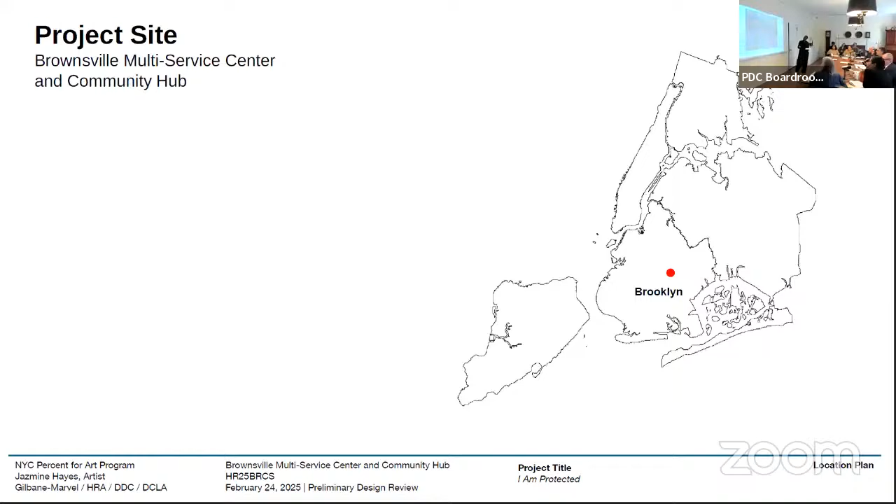So I'm going to go through some of these quite quickly. I won't do an overview on Brownsville at the moment. For those who are home, this document is available to the public online.

Here we are. So just to reiterate the themes of this project, I wanted to focus on themes of healing, protection, and art as prayers of affirmation for the community of Brownsville. Originally, this project was titled the Brownsville Youth Empowerment Center, and so my intention is always to speak to the community, to the youth.

We now have four working titles under the title I Am Protected. These four working titles form one poem, and I will read that for you: In my mother's garden, I am divinely guided. Like the seeds in my cornrows, I shall grow tall to the skies.

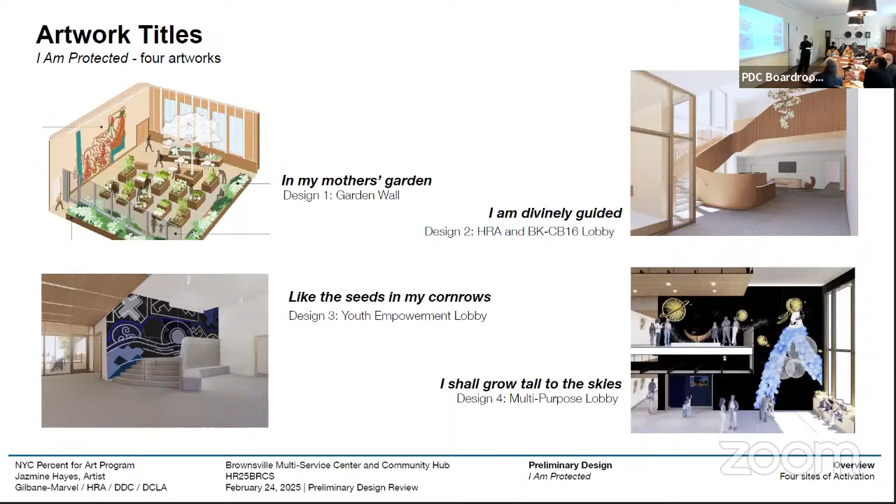So the first design, located on the left wall facing the street and the garden wall, is titled In My Mother's Garden. So we have some elevation drawings, and this is an in situ rendering. It will be approximately 13 feet by 21 feet, very large, and will be a copper relief sculpture.

We've had some developments since we last spoke in June—material development, installation development, and maintenance development.

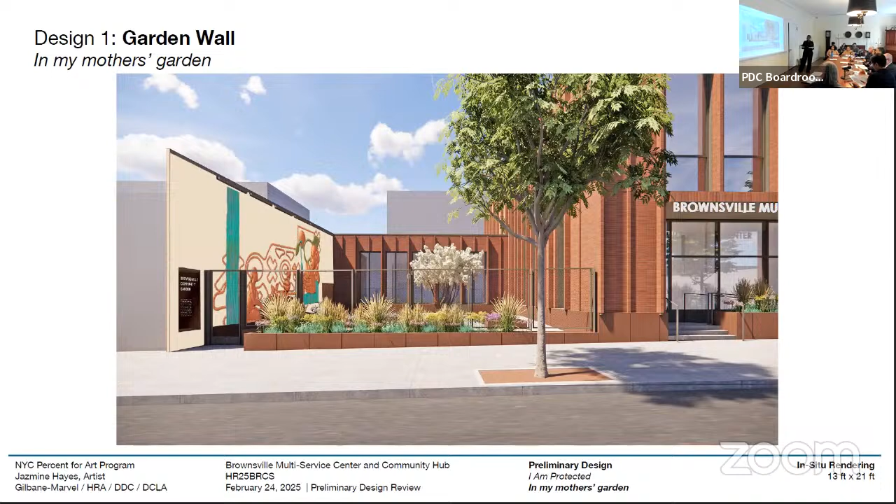So this is the 3D rendering of the design. To your left here, you will see the turquoise patina that represents the river and the water going throughout the design. You also have the braided pattern that is a replica of the aerial view of the NYCHA mapping system of Brownsville houses. And then there is also a green variegated patina for the foliage in the design.

So these are just some 3D renderings. To introduce the process, this is a forged copper process. This is a digital rendering used as a reference, and from that reference we create this 3D rendering to send to the fabricators, who create it using flat copper sheet stock secured over temporary forms like sandbags for bracing.

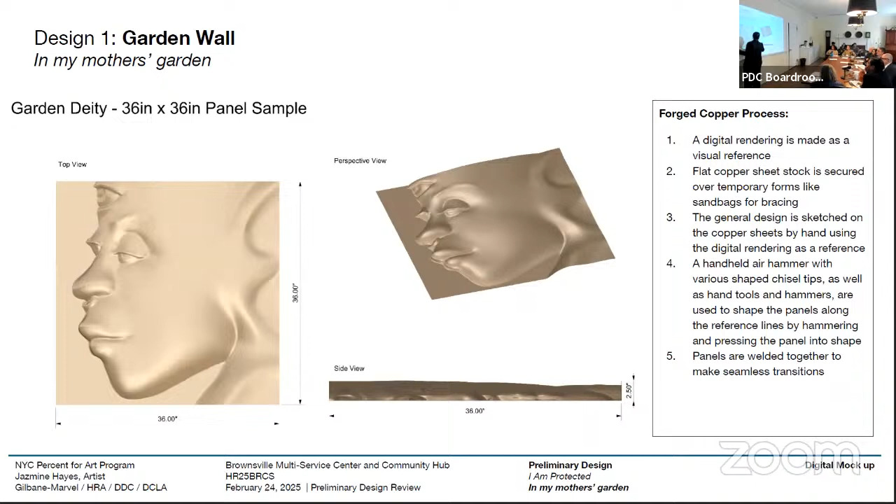The next step is the general design is sketched on the copper sheets by hand using the digital rendering as a reference. A handheld hammer with various shaped chisel tips, as well as hand tools and hammers, are used to shape the panels along the reference lines by hammering and pressing them into shape. Then the panels are welded together to make seamless transitions, and you could see part of that process here—this is the side view, a perspective view, and then a top view.

So far we don't have this in front of you. I myself could not carry a 3 by 3 foot copper plate, but we have this coming in hopefully this week from our fabricators. This is a 3 foot by 3 foot prototype.

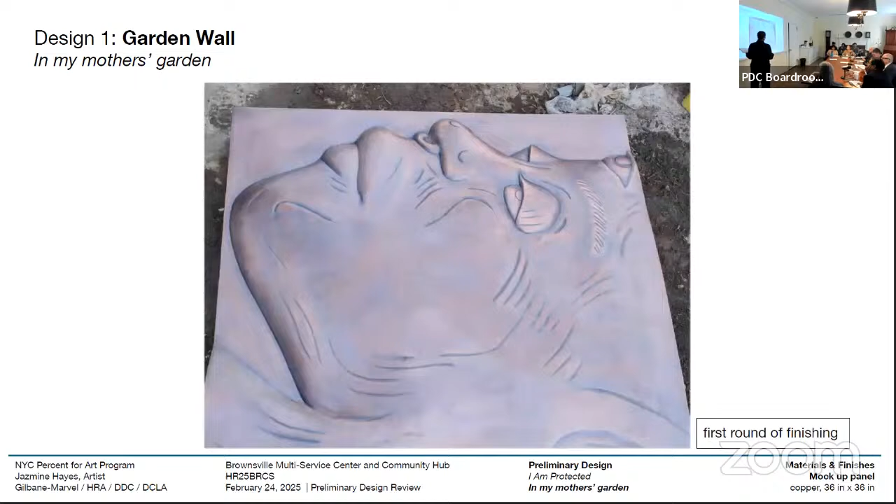The process here: you have the unfinished copper mock-up, which is actually quite beautiful. The first step is a round of finishing, and then this is the finished polishing technique. Right now we are discussing which lines I may want to shift, different things I want to shift to represent the detail in the design.

In this bottom right corner, we have the patina reference, which we're also working for it to look more closely to these examples here. We have the foliage green that will go onto the foliage of the design, and then the aqua blue and the verdigris green. We're hoping to mix those two to get the exact patina to match the actual design.

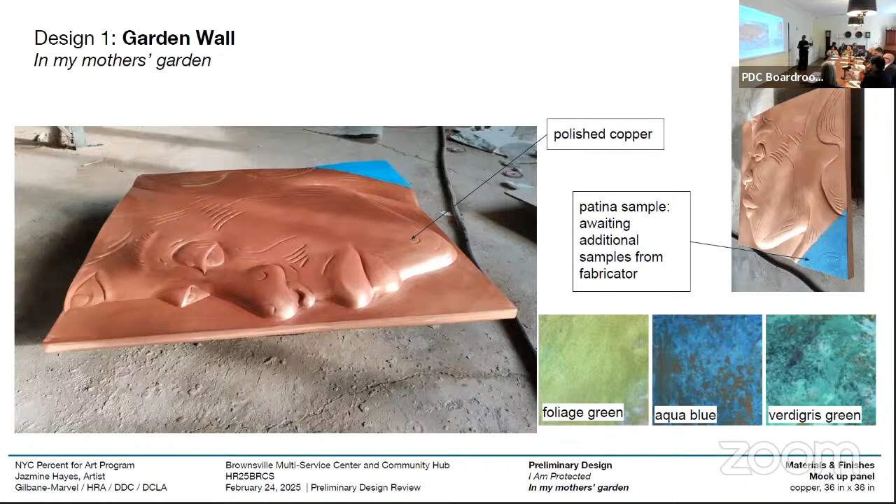The second design is 'I Am Divinely Guided,' located in the HRA and BK CB16 lobby. So we have an in situ rendering here. The design or sculpture will be 10 feet by 8.5 feet. These are just some renderings.

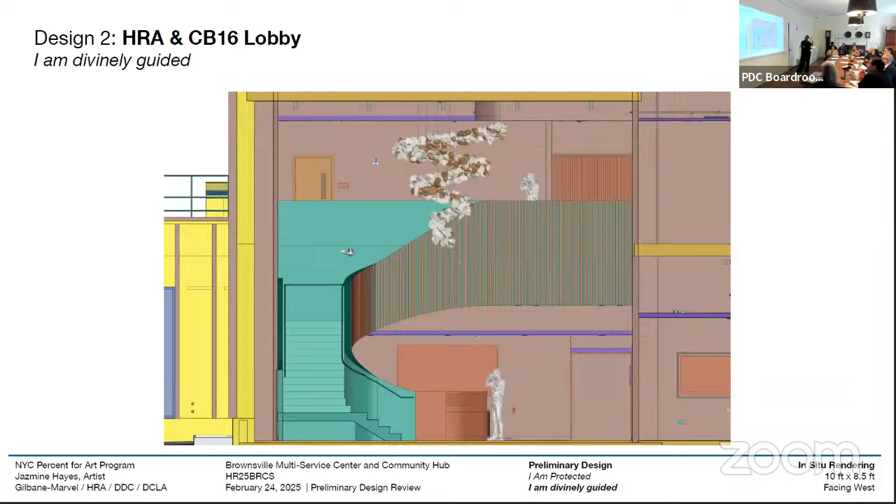I will be working with a community organization — we are still figuring out which one — to collect recycled material within the community. The colors will be blues and creams, to keep this theme of tranquility throughout all the designs, and there will also be a copper finish. You may see some details where, on the actual shell, this will be polished out and sanded before installation.

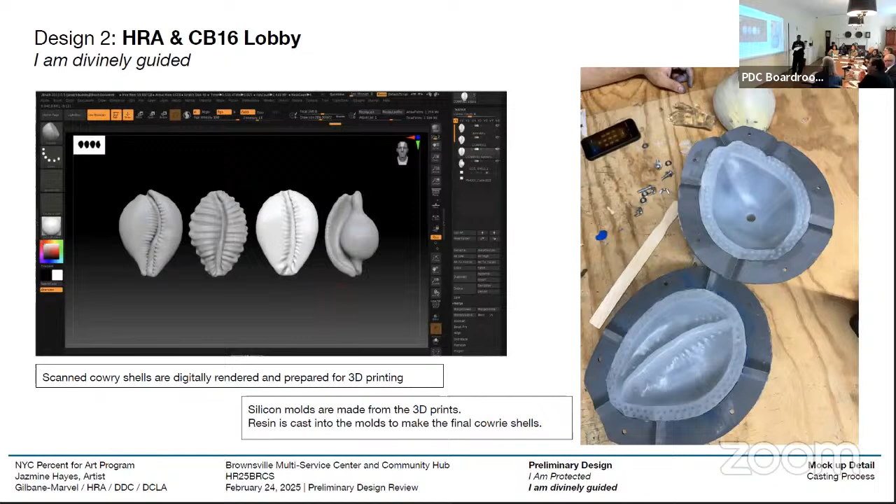To show you the process: we create a 3D print from digital rendering, and from that 3D print, silicone molds are made. Resin is cast into the molds to make the final cowrie shells, which you have in front of you today. They will be sized at 8 inches and 10 inches. The process for the plastic is basically embedding it into the mold, the cast of the cowrie shell.

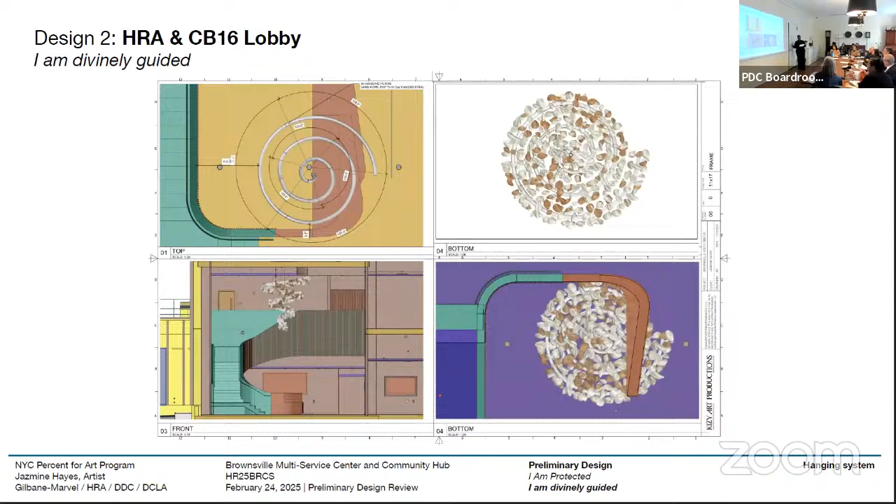There were quite a bit of questions on installation and the security of this piece because it is a heavy piece — it is under 2,000 pounds, which is our limit. I've been working with engineers to look at a steel piping system that will securely install each shell individually.

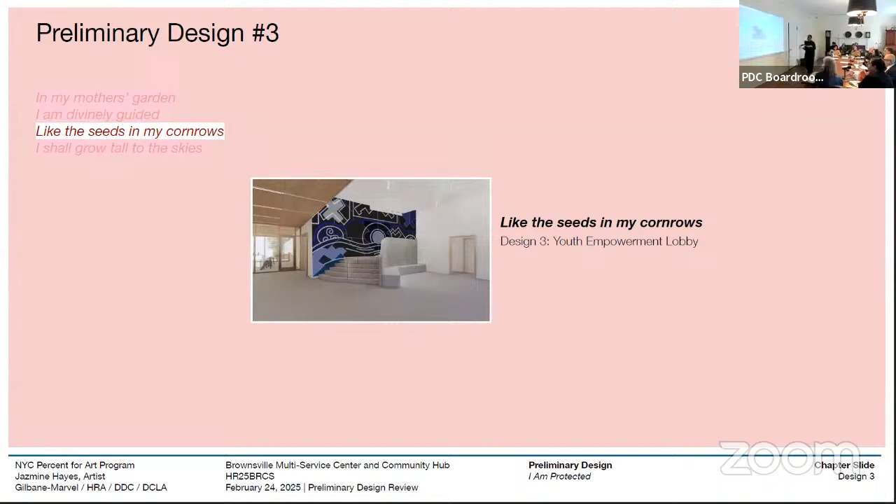Okay, and the next design is 'The Seeds in My Cornrows.' This will go in the youth empowerment lobby.

Yes, my bad, I'm holding onto this like it's my baby. Touch everything you need to, you can pass that around. I'm so sorry.

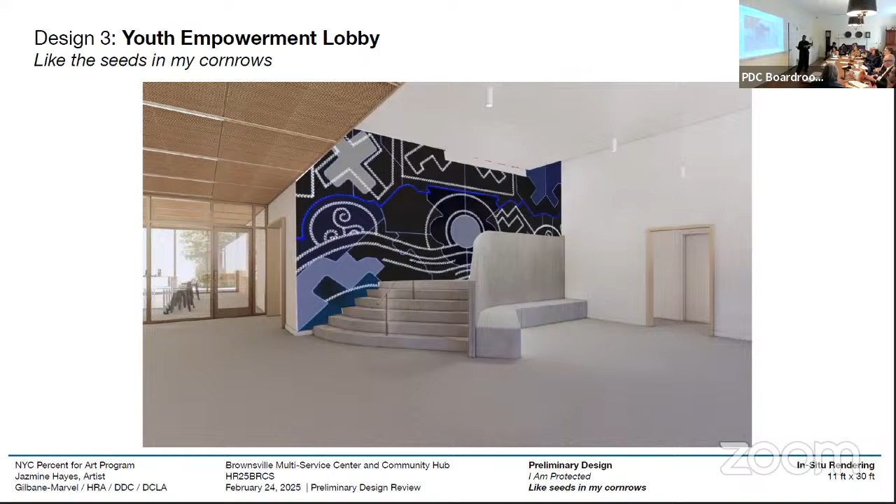So the theme of this design is using pattern as reclamation, looking specifically at NYCHA architectural structures in relation to carceral architectural structures across New York City and the United States. And so wanted to put a positive storyline to these spaces.

Let's go to this example first. The material that I have chosen is the Baltic birchwood. It has a lot of spiritual meaning to it and is also easily carvable. It's often used for drums, etc., and different materials. And so the wood will be stained. We can pass this around.

So the panels underneath to this left side keep the original design of the Brownsville houses mapping system. And on top of those panels, CNC milled braid will go across those panels and designs that the youth essentially created through these workshops.

The youth created different patterns that they wanted to see around them, representing different things like protection. I essentially asked the youth, what would they want their space to look like?

So here you see the braids—I basically took designs from the youth and created and collaged it into different patterning. So here you kind of have like this water wave, you have this circle in the center.

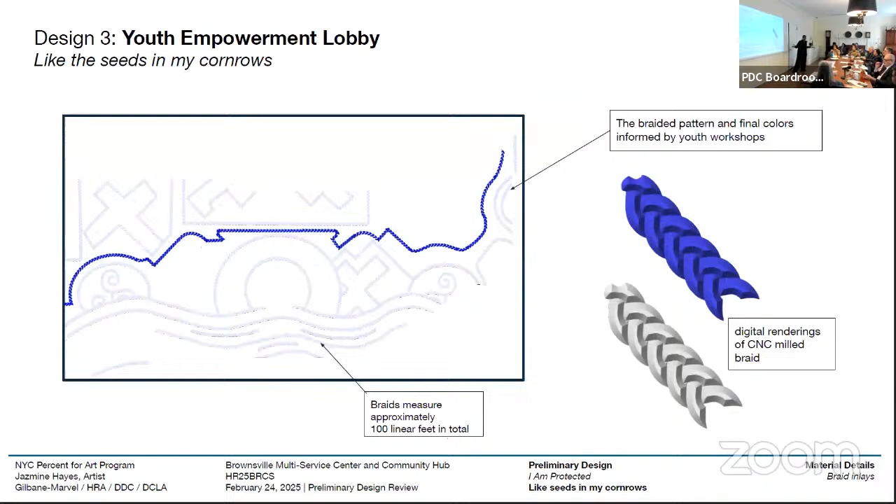The wood will be stained in different hues of blues. And then these are some phenomenal photos from the workshops that we created. We had a master printer from the Robert Blackburn print shop, also named Jasmine. So it was a Jasmine Squared project, working at the Youth Design Center.

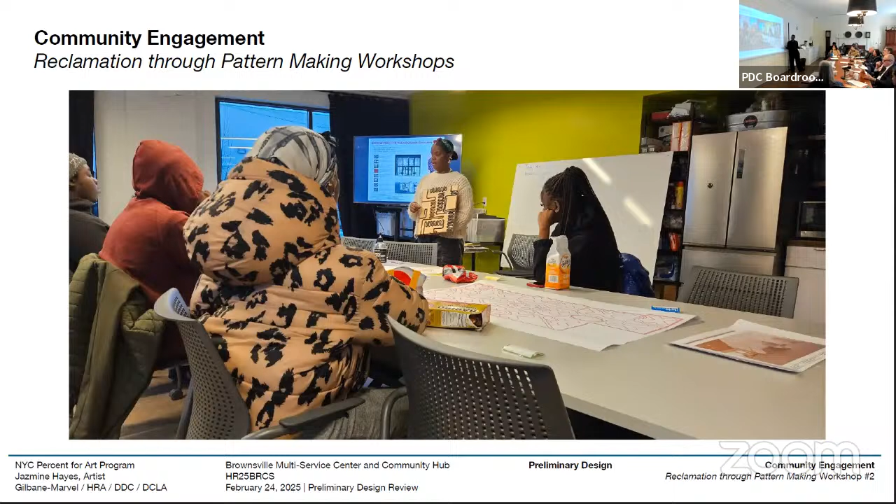And we had about 10 to 12 participants, supplied stipends for them from the budget, and really just wanted them to have a say in this design overall. You could see here like the NYCHA mapping system, and you kind of see that replicated into the final design.

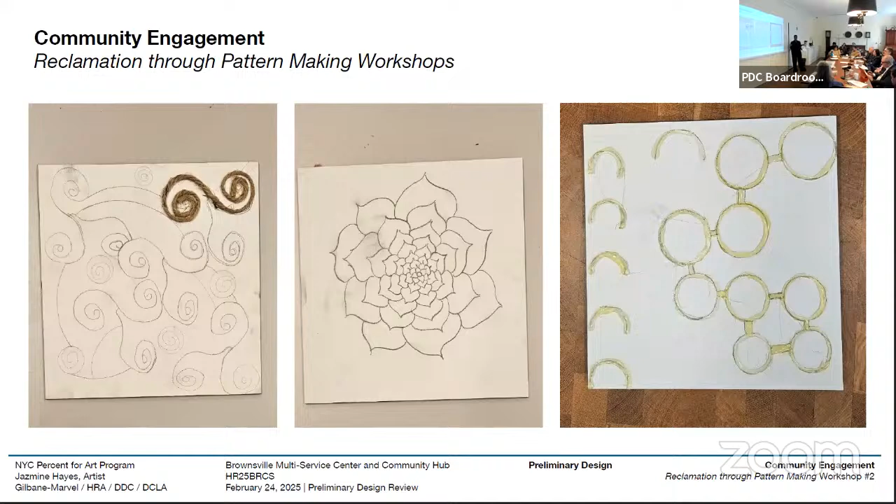So essentially the youth created different patterns, different shapes, and put it onto a plate to create texture, which is called a collagraph. Some of them did a blind print with no color—this is my work here, which is an example of that.

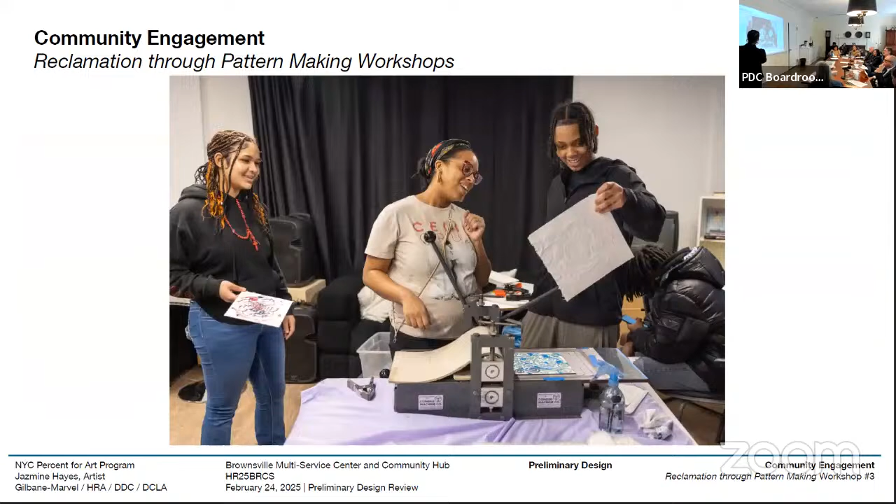But they also had the opportunity to play in some ink, which was really messy. We gave them like 3 colors and they were like, we need more color. But overall, that is Jazmine. It was a really beautiful experience.

Okay, we got a lot of slides. The last design is I Shall Grow Tall to the Skies, located in the multi-purpose lobby. This is an in situ rendering of the Moko Jumbie figure—the Moko meaning healer, Jumbie coming from the Congolese term Zambi, which represents spirit or protector.

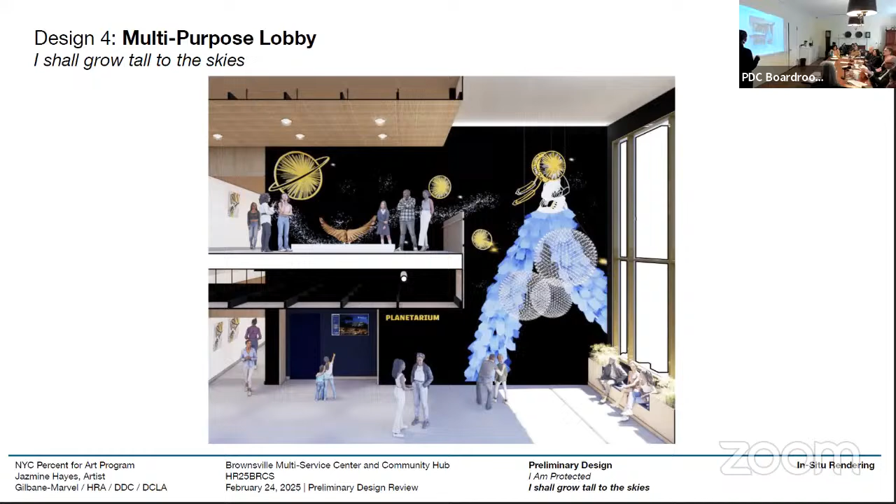Overall, the theme of this is the Moko Jumbie is the protector of the village. Brownsville is beautifully called the Ville, and so that is short for the village. I wanted to instill those thoughts of protection and also have a cultural reference to the community.

This is our most complex design, actually, which we didn't expect, but there will be 4 parts to this design. So the first part are the planets, which will slightly protrude from the wall, made by a CNC milled acrylic sheet with a copper paint finish.

The second portion is here—it is the torso, which you can see here. It is the head and the torso made from a CNC milled acrylic sheet and hand painted as well.

And then we have the Moko pants, which essentially is a relief. It will be CNC milled as well. The material is an EPS high density foam, or a better terminology is a high density urethane. It will have a hard coat application and a single color painted primer.

To the right here, you can see it outlined in red. It's kind of hard to see here on the screen. But basically, this will be panelized into sections and installed.

It won't be like single sheets. That's a lot of work, so I want to make sure that's clear. Yes.

What happens, same kind of thickness? This is something I need to speak with the team about, but it will have approximately the same thickness and it will be rounded, just thinking about kids, adults, people being clumsy. We don't want anyone running into a corner of anything.

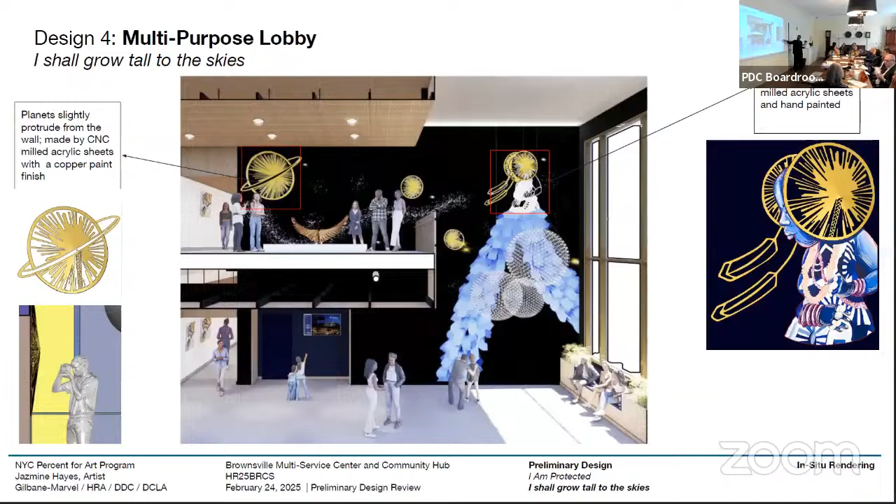And then the torso will be hand painted. Again, also texture, we'll have lots of texture as well.

And then you also have the sample of the rag roll. So the samples that you have in front of you today, it is matte. It's just the paint finish. I hear you talking about it.

Yes, so my team specifically is talking about an intense hard coat application. It will also have a sheen to it. The rag roll finish will also have a sheen to it as well, just to think about it, because matte things can be destroyed very easily.

This is also another opportunity for community engagement, for a one-day astronomy-based art making workshop using references of constellations and planets. Parents, elders, and youth are welcome to attend to create an intergenerational activity with the Brownsville community. Workshop outcomes will inform the design development of the Moko Jumbie pants.

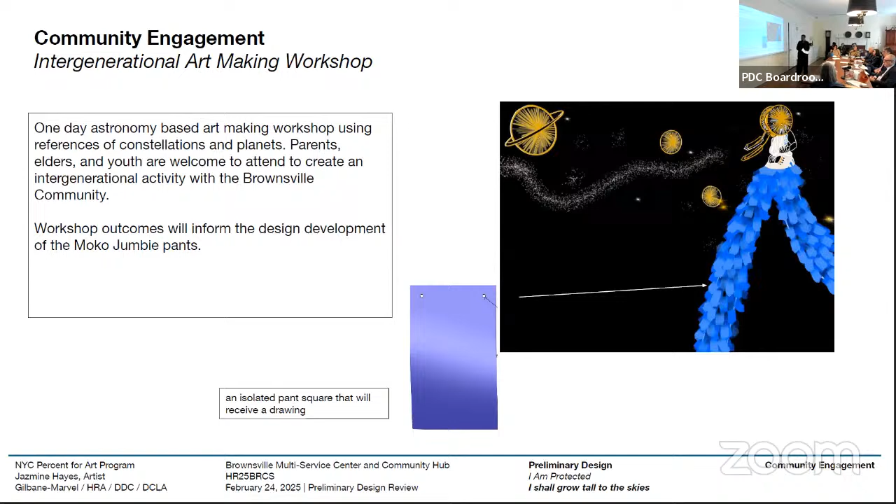And so there will be select pieces of the pants that will have drawings in this style. And so you could see here, these are just some examples from another project created specifically for the Brownsville houses.

Yeah, I think that's most of it. We will go into signage now.

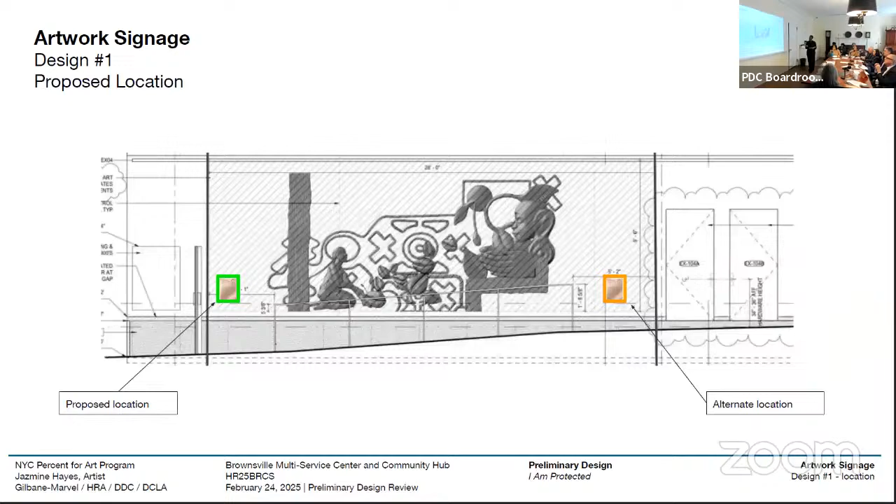I will come back to this slide, but the material of the signage will be laser engraved copper plates with black infill, which you can see here on the text. Each sign will have part of the design relieved onto the copper plate as well. They will all be sized at 11 inches and 14 inches. So these are just examples of placement.

And then maintenance. I really want to keep maintenance as minimal as possible. Getting excited again.

So the garden wall will have a graffiti coating or sealant and minor rinsing with a hose. This will routinely happen once a year, and this graffiti coating will also help with the patina aging, as it will actually slow down the patina aging on the copper sculpture. I am okay with the aging of the sculpture, honestly speaking, as the neighborhood changes, et cetera.

The HRA and CB16 lobby will have periodic dusting. The HRA has agreed to doing this routinely every 6 months, where someone will come in. We've talked about a vacuum system versus the dust being blown everywhere. I was just like, where will the dust go? And so it would just go in other places.

And so using a vacuum system to dust the cowrie shells, we've changed slightly the positioning to make sure it is accessible. And it will have to happen after hours when there's not as much traffic in the building, of course. The youth empowerment lobby will also include a dirt-resistant sealant and occasional wiping down, and the multi-purpose lobby will also include those same things.

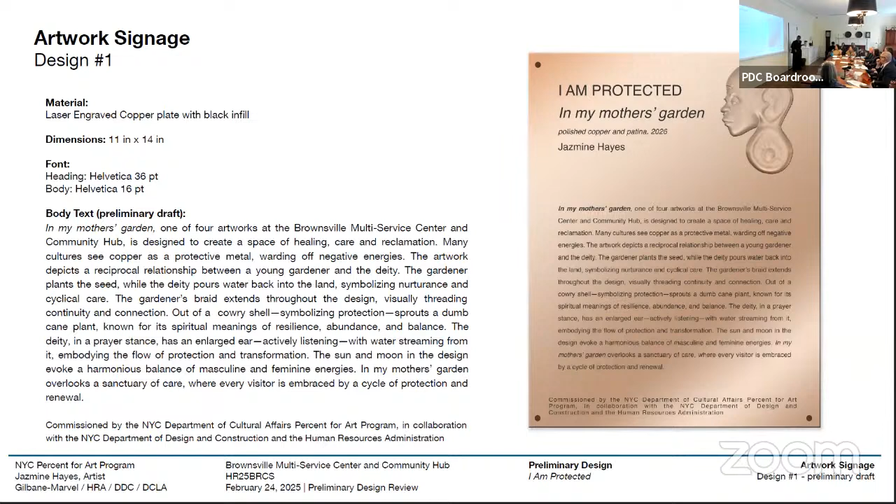Yes, well, me and the studio manager, we worked tirelessly on this. And so each design has a very detailed description of the work and the themes of the work.

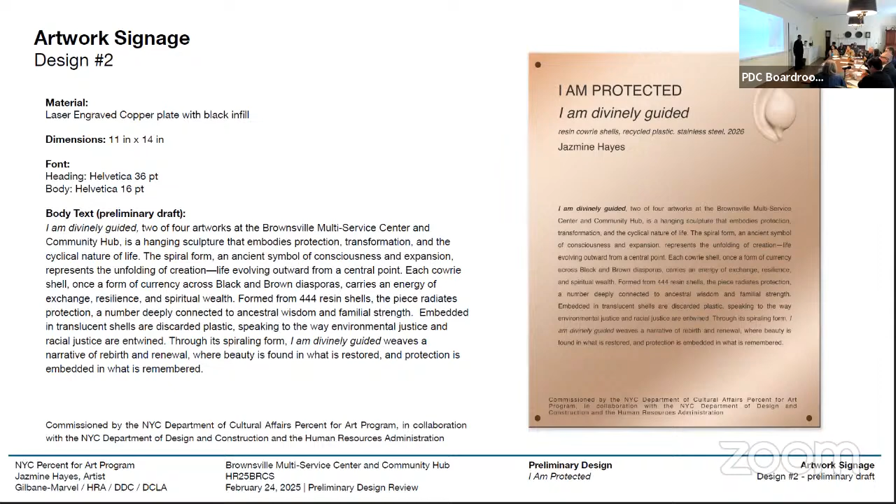The storyline, the narrative throughout is just really, really empowering and powerful. I love that you include the public housing throughout and weave it literally throughout the pieces. It's just so important. And it's gorgeous, the braided patterns. Even talking about the Ville, which is something that folks here, including myself, may not be aware of, but you're making us aware of it. It speaks to the village that raises the child, how embedded you are in the village, that you're serving here. It's just really, really gorgeous.

And then these materials and colors. It's a project that is so exciting to think that people will be able to see it and be there and touch it, maybe not too much, but a little bit. And we all can see it too. It's such an amazing addition to Brownsville, but also the city of New York. So just gorgeous. Thank you so much, Demi.

Yeah, I just want to, hi, thank you, Lauren, and second that and say it's an exemplary project. It's really an exemplary project. And I appreciate so much about it, but specifically, I wanted to talk about the materials and the detailing, because I think you've really taken this to another level of projects we've seen. And I'm sure you're working with Silman, structural engineer, and all those attachments, and it's both innovative and feels a part of the place at the same time, because of the content you're working with. I also wanted to commend you on the signage, because it's fantastic to have somebody thinking of that and making it part of the whole project, placing it and writing it, and the material of it, so it all fits in.

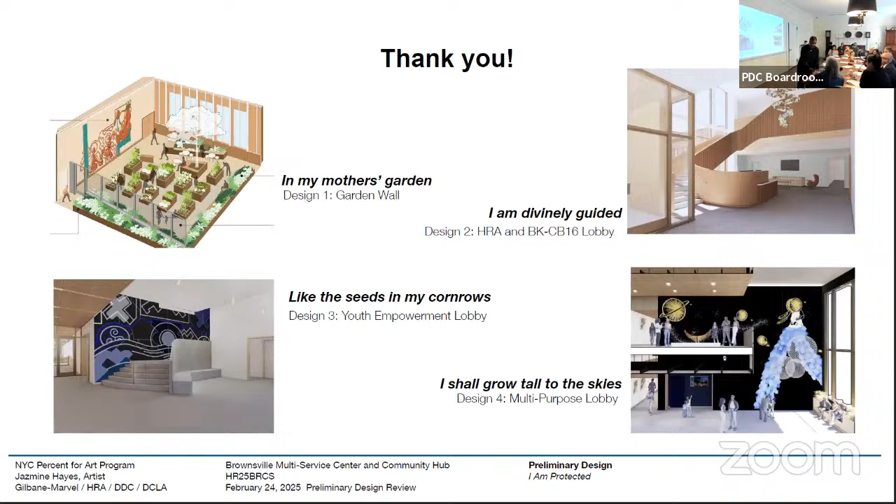So I wanted to ask one question about the cowries, which are so beautiful. I was trying to figure out how close I can get to it when I'm on the stair, because it looks so interesting to be able to see the material inside. I love seeing the recyclables in there. So I just want to make sure I can see it, but I know you don't want people to touch it. I didn't want to suggest what to do, but I think you've got great open ideas to any suggestions you may have.

I was wondering if one of them should go somewhere where somebody could actually see it, but I don't want to take away from the beauty of the spiral. So I thought if somebody could really look closely, it would make it even more powerful. We could talk to the team about maybe making an extra shell, like how you have this prototype in front of you, and next to the signage there's an encasing of that shell so people can see. That would be so cool. Yeah, I think that's definitely something, and I appreciate that.

When you're at the top of those stairs, is that wall - I can't really tell from this rendering - how far away is this like painting? So you will be able to see it but you won't be able to touch it, which I think is good. Because they're heavy, right? So you don't want them to touch it.

Are you always using recognizable materials like the Dixie cup and the spoon? Because when you were moving it the other way, I couldn't tell what it was - I just saw that it created a beautiful color. Some of the shells will face outward so you can see the material in it, and then some of the shells will be kind of abstracted, which I want - that abstraction.

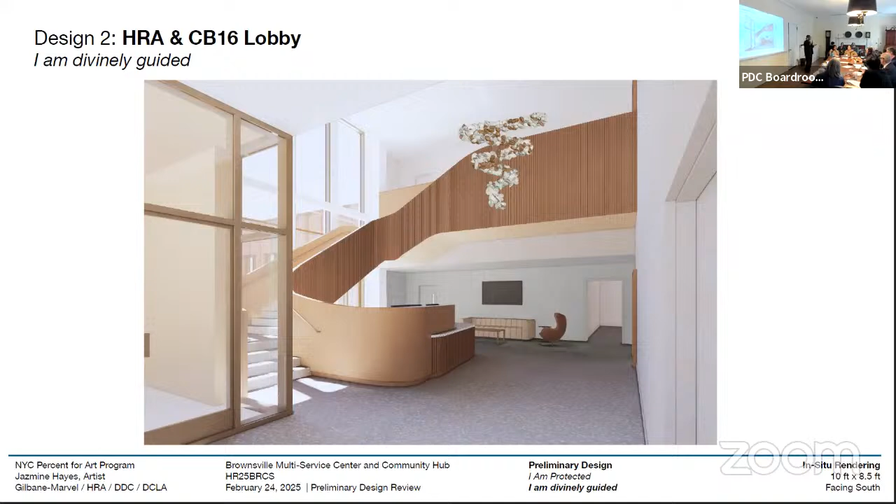We did mention this in the appendix. Sorry, I'm going through all the slides - we had sent in a rendering, so, yeah, there we go.

In this rendering, because there was a question about seeing the material, we gave an abstract rendering of what it may look like from afar. You can see also in that rendering, when you look closely, that some of the shells, like the booty of the cowrie, will face out.

I think it's a question for you - do you want it to be recognizable, or do you want it to be subdued? Because these objects are so recognizable once you know what they are, if you had the sample then you could look up and say, oh, I get it now. But I also don't think that's necessary if you don't want it to be. So it's more of a question of what you're actually embedding in there, and something that people can tell what it is.

For myself, it is necessary. I think sometimes, although I am using abstraction in some of these designs, I want there to be recognizable symbols in each design. So I do think it's important to acknowledge that some of them will face out so you can see that material. But I don't want it to be in your face - I want the viewer to essentially one day be like, oh, I didn't realize these were solo cups, or maybe I need to look deeper at this.

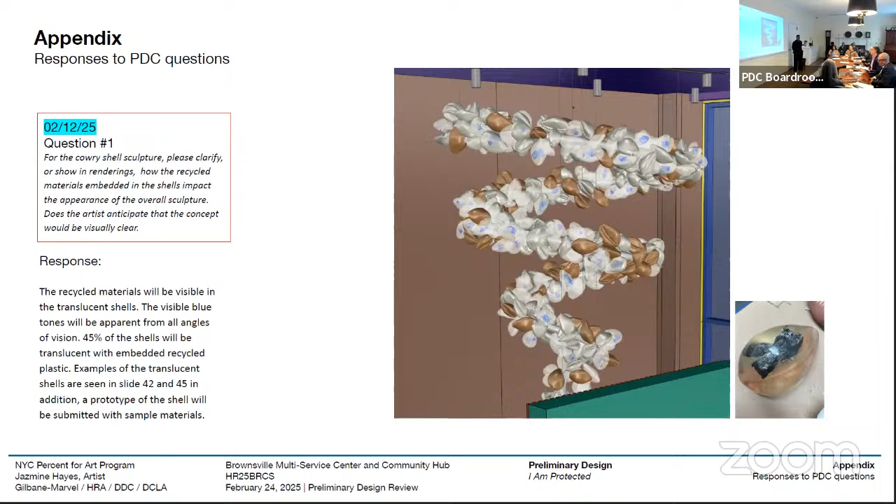The CNC milling, we are essentially paying for labor for the CNC milling, so we have some guidelines to limit it to 100 linear feet. I've wanted to shift things, making sure that it still is an example of the youth designs, but also making sure we're fitting in budget as well.

I just think overall what you've done here is so amazing, but the youth empowerment lobby remains my favorite aspect of it. Thank you. It blew me away the first time, and we'll talk about a personal piece outside of this. But yes, okay, thanks. Thank you, so beautiful. It is. Thank you.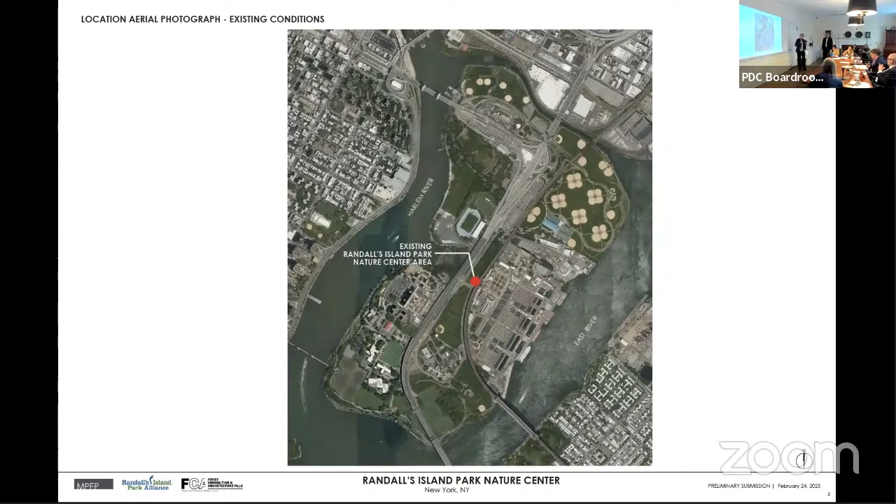This very central and visible building currently holds our sports fields crew, who are going to be moved elsewhere. It's actually a little confusing because the building is so central and welcoming that people try to visit our fields crew.

Next slide, please. This diagram was put together specifically to emphasize the centrality and accessibility of the Nature Center. The building is adjacent to the park's roadways and parking lots, as well as public bus stops, and is especially accessible via the island-wide bicycle and pedestrian pathway system. You can see under the arches of the Hellgate Bridge, the Hellgate pathway runs along the north-south axis of the park and makes it especially accessible via bicycle and pedestrian routes.

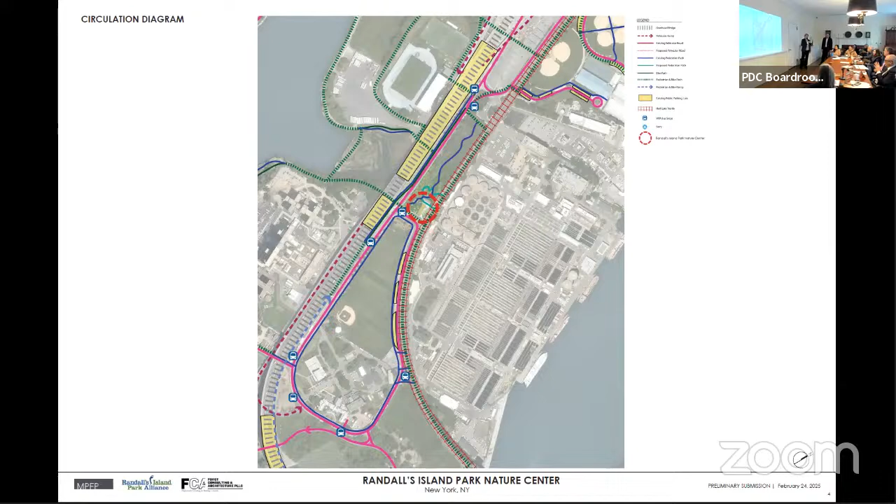The new Nature Center represents the catalytic first phase of activation of the site. It will take advantage of and help RIPA educate visitors about the adjacent salt marsh and freshwater wetlands. They were restored in 2008 and form the center of our waterfront stewardship environmental programming, serving thousands of students each year in partnership with public schools, mostly coming from East Harlem and the South Bronx.

So you can see the salt marsh here and the freshwater wetlands here. This new nature center will really foreground both of those resources, and the freshwater wetland especially is a non-point source pollution filtration mechanism, naturally filtering stormwater that comes in from the adjacent fields and roadways. It's a wonderful teaching tool, to which the Nature Center will bring additional visibility and attention.

In the next phase, the center will also host volunteer events, free public events, and programs in tandem with our urban farm, which is an easy walk just south under the Hellgate footbridge, the Hellgate trestle.

The next phase envisions further activation of the site across the road with access pathways, additional parking, and a salt marsh viewing platform. So you can see the Nature Center, and then you can see some of our plans for future phases to activate the area between the two marshes and also adjacent to the Nature Center.

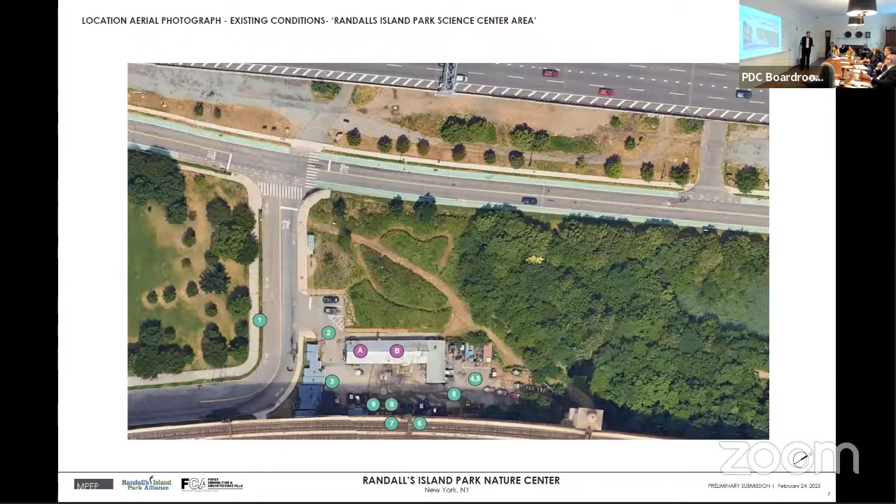If you look at this building, it's a relatively tight footprint we're working with. We looked at really just redoing the roof in a scheme, essentially building outside of this building and putting a simple roof over it, raising the glass to give a feeling of a much bigger building. But the existing walls all remain, we're just encapsulating that with our new facade. So you can see the current condition.

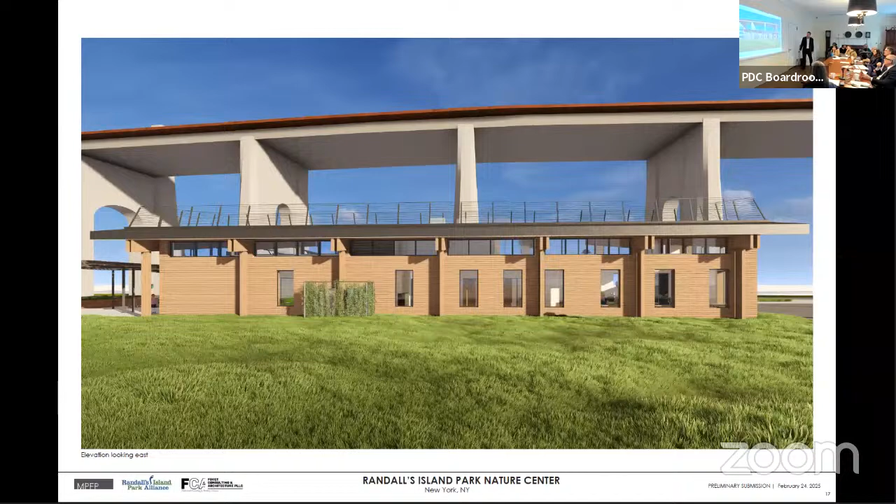It's easier to see in this view. Those CMU walls still exist and are all enclosed, but we took the structure, built it around and above, kept the roof relatively simple, made it a green roof, and encapsulated the rest of those walls. As part of our grant we had to leave those walls, so most of our windows line up with the original windows, with some small modifications. Adding that clerestory is really where we think we'll get the benefit of both the light and the feeling of space. We also wanted to add the green roof and solar panels, but that's more part of the programming discussion with the Nature Center and classroom.

We have a relatively tight footprint, as we discussed, and we're trying to fit a lot of things in here. There's a lot of program and staff that have to be supported in the area on the left. We've worked those little desks as tight as we can to fit the staff and provide bathrooms to the public as well as the staff in the classroom areas.

We did want to open up one side as much as we could. That's where we're not following the original footprint, having that glass open up so the classroom can come outside. We have a pergola for shade, and eventually the natural resource group will be planting that with plants as well.

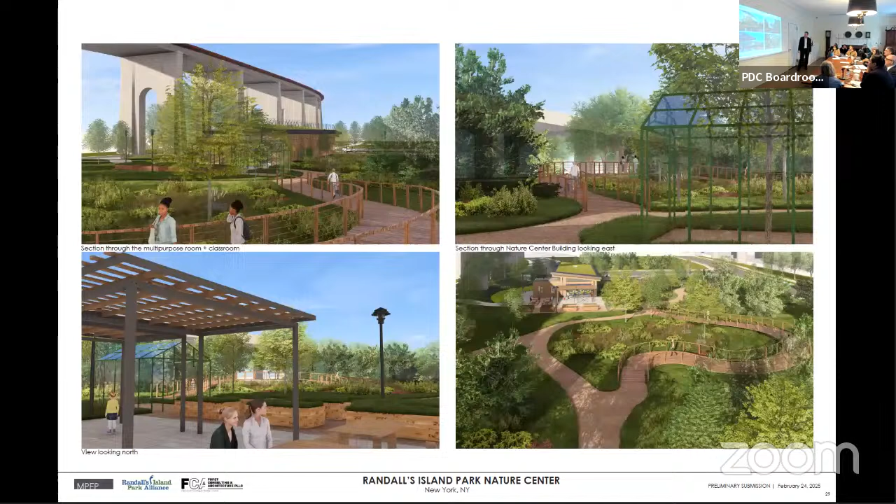We brought a sample of the Thermory. It's essentially a modified ash, and aluminum trim would be the metal for the windows, the black flat mat, as well as the facade of the fascia. Some concrete paving as well, and then some of the walkways would be gravel that we've worked with Parks on, based on other standards they've used throughout the island.

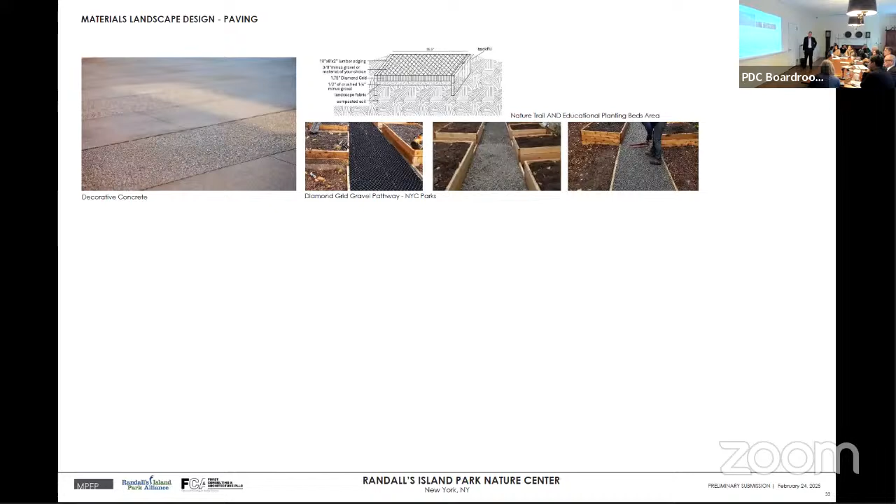Same with the furnishings. Plant material, again, somewhat native, working with a resource group on the island. They're going to handle most of the planting themselves. We'll just assist in getting some of the procurement of it. I think that's it.

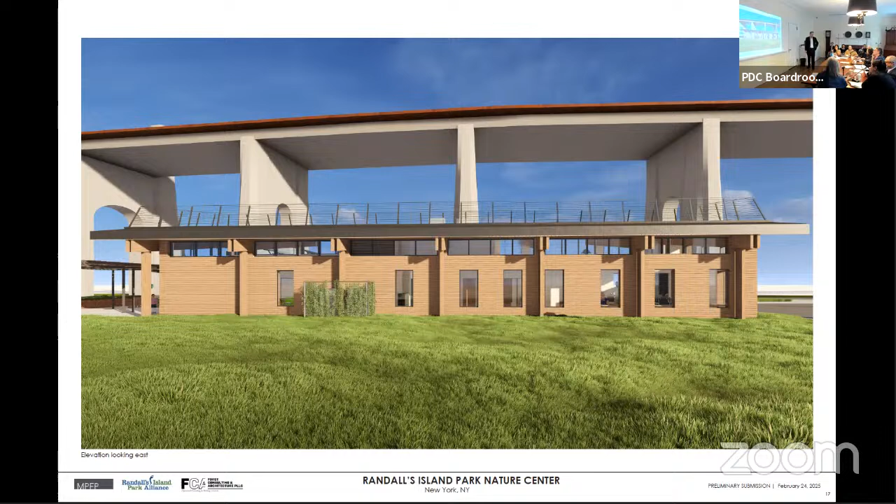Yeah, I would tend to agree. I think part of what becomes distracting is the angled corners. They almost become an architectural expression in itself that is fighting a little bit with what is a very elegant architectural expression beneath. You mentioned the idea of maybe adding other plants that are not sedums. I wonder if something taller, should you have the proper soil depth to support it, may distract a little bit, or not make it so present.

Another option to consider is that OSHA does have a certain reach within its code. I wonder if there's an opportunity to put a planting bed outboard of the guardrail that you can still maintain from inside, hands reach. By having maybe taller grasses or something of more volume, you minimize the aesthetic of the perimeter guardrail, and maybe bump up the aesthetic of the sustainable aspect of the building, which I think is great.

I was going to ask before Jimmy asked if this was accessible, because as a learning center, being able to bring especially children up and see that would be great. If you're not able to do that, I understand there's also operational things, but maybe having a little bit more landscape expression could be another opportunity to highlight the great things this building's doing.

Okay. I know you had a straight rail before. Yes, and the minimum height you have to have is 42 inches, it does have to be 42, so it's a code, you have to, there's no way around it.

But I think the suggestions of the landscape are a really great idea. I don't know if you can get it in there, but you'd have to put an elevator to make the roof accessible, and there goes your footprint budget. Within the building it doesn't really work, you can't even have a stair outside, because if anybody goes out, they have to have an elevator. So for such a small building, it would be a nightmare for you guys.

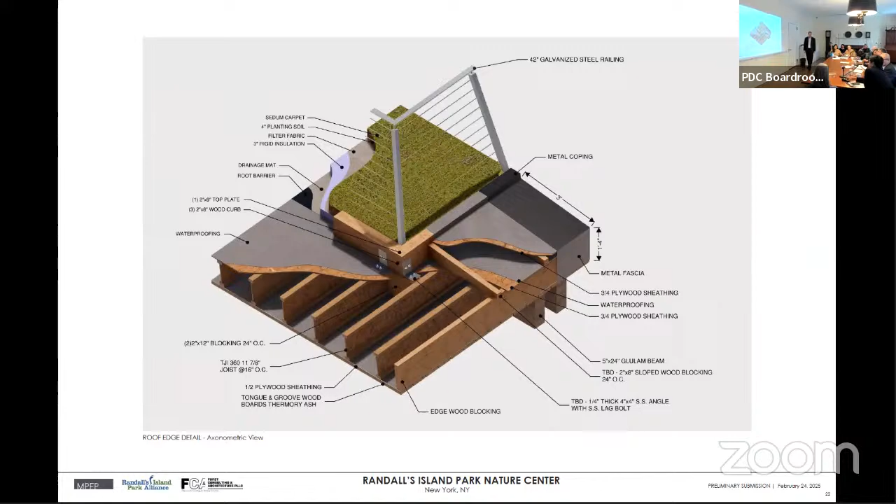And then on the sides it says Randall's Island Park, but the identifier is really for the building. That's maybe a minor point, you might have discussions internally about this, but I wonder why on the face it's called the nature center, while on the side it refers to the entire area.

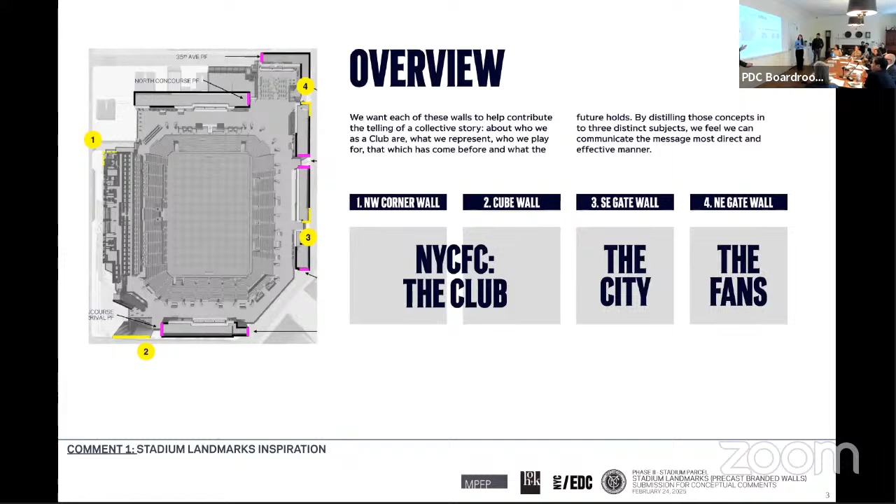So first off, we have the cube wall, which has the club monogram, the NYC. It's literally the center of our brand, and also figuratively.

Then we have the northwest corner, which is that New York City word mark that utilizes letter forms similar to what you see in the badge. City is large also because it's shorthand for our team name, so as it wraps around, you get just a really big city.

And then on the southeast wall, we have the pigeons. So the pigeon is a really funny story. Our fan Amari, from the beginning, just showed up with this pigeon mask, and it kind of became an unofficial mascot that the fans really seem to love throughout the years. You can see some of the executions we've done in scarves and retail. That's like what we call a jock tag on our jersey. It's really taken on a life of its own, and we've had a lot of fun with it, seeing it come up in different ways.

And then the northeast wall has that waving flag. Soccer culture is so special in the fact that there's lots of drums and flags and banners. You don't really see that at a football game. So to have that symbolism and also have a nod to our fans, who've supported us for 10 years now, which is incredible, we feel that's really special to highlight the fact that this stadium is for the city, yes, but also it's here because of the fans and the soccer and the people.

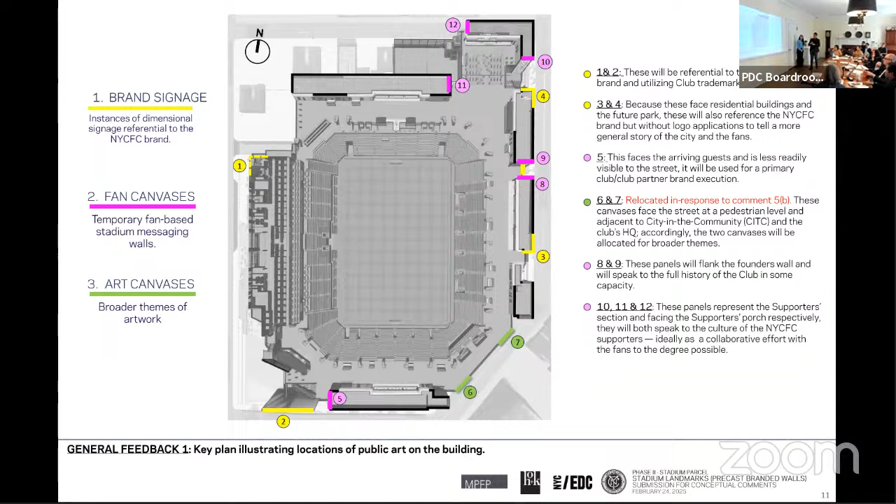Go ahead. Yes, thank you, sir. Of course.

A big portion of the exterior facade on the stadium is made out of precast panels, and those panels are sometimes exposed to express the nature of the concrete, and sometimes cladded with brick paneling. The brick is a big part of the identity of the stadium, and those brick panels are poured into concrete molds.

For the actual application of the art, and I know we had this image before and there was a comment for us to supply samples, we have these samples here that show 2 different types of treatments. Both of them have the Fairface concrete on the outside that will be a sandblasted, light sandblasted face of concrete.

The recesses are meant to be recessed in 2 grades. One that exposes more of the dark gray aggregate on the inside, and one that is meant to lightly express the aggregate, but not as much. So this is here as a lighter treatment, and this is here as a darker treatment. The darker treatment is meant to express hierarchy.

The darker recess here will express the hero component of the art, as Matt's going to walk us through now. The lighter aggregate exposed is meant to express the secondary or supporting component in the artwork. Relying on the recesses, these are 3/4 inch recesses that will change with the position of the sun and lighting, so we're also expressing a shadow line over these as well.

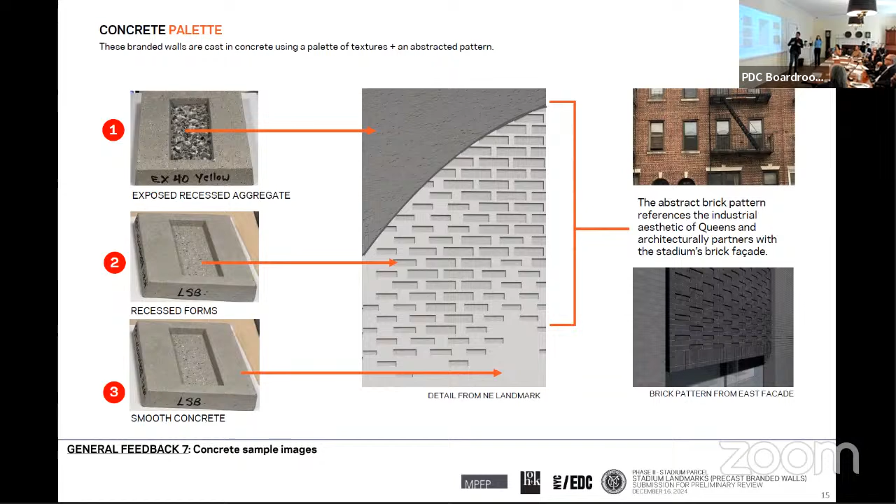So I'm going to go ahead and start working my way around the building and share some bits about each one of these canvases. This is that northwest corner, faces the freeway again. Just so you can understand the layout, we're going to look at the location, a previous design, and then the active new elements we're addressing today. As Rashad mentioned, and I mentioned before, we're keeping both of these in a more civic tone when it comes to the brand itself. The entire way we've been looking at this is keeping these elements as evergreen as possible, so they have a long lifespan and can change and alter as the brand changes and alters.

Because as we know, logos get redesigned, they will change. So we are starting to seek out elements that will work no matter what with the ethos and philosophy of the team. This is one of those. By removing the FC from it, it really becomes about the place while it's still representing the club.

This was some of our inspiration from the new brand identity, and we really loved this. We thought it was great. We started to look at it in the mix on that particular layout, but the nature of the typeface is condensed and narrow, and it wouldn't fit in a clean way to represent the word city the way we wanted.

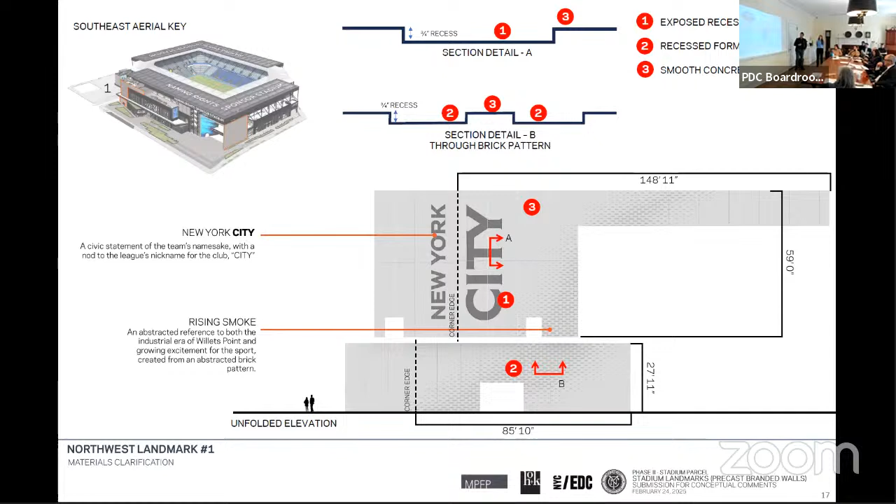Now we'll move on to the monogram. This is number 2 right here, and we're looking at just the pure monogram. There was a reason we originally started to talk about the full badge, but again, that idea of moving away from the full-blown expression of the badge at this moment in time, we felt that the monogram does multiple things.

It starts to move away from this specific expression of the brand by this specific agency, and allows the monogram to represent the city again, but also represent the team and the club. As Rashid mentioned before, 60% of folks are going to be coming to the stadium on that west side, so this is visible from the train. This is going to be an expression that starts to be that civic-minded element as we think about those two corners.

And that moves us around the building, and now we're on the east side. We can see the previous design that we had submitted before.

We had taken in the comments from the group and really started to look back at all of the elements and investigate what they were doing, and how could we, A, simplify the design, and B, really start to bring it more in line with the flag wall that you'll see in a moment.

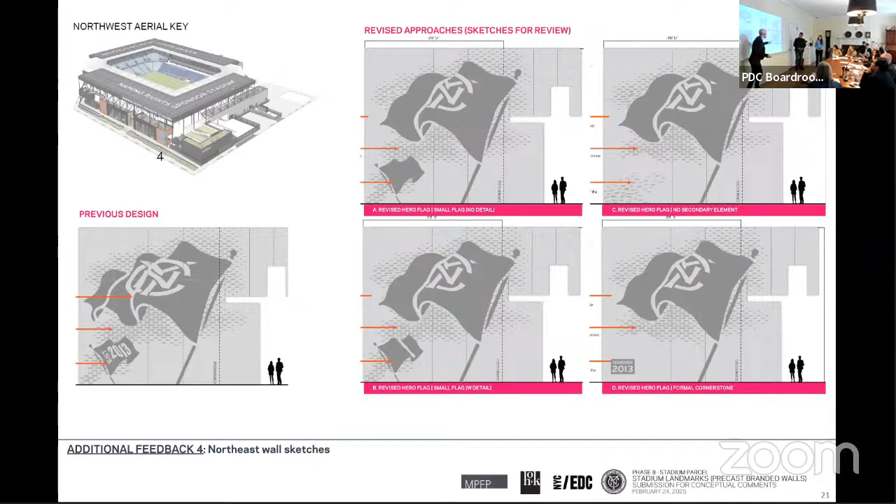We ended up working with NYCFC, and we landed on this being the approach to share with you all at this time.

When we look at what we had before and all the elements we had submitted, you can start to see some things that are on their own wavelength. When we investigated this based on your comments, it got better, it improved, and it became more of a family. This is where we ended up landing. Thank you for listening.

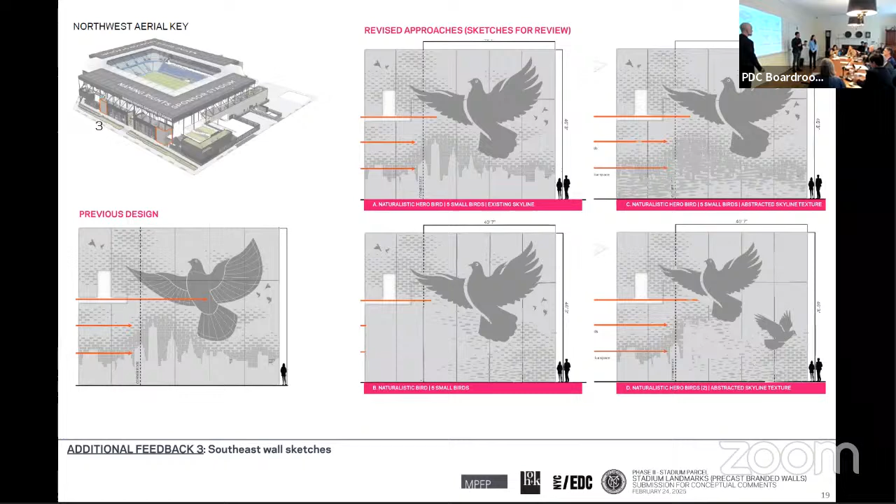The aspiration should be to move to Queens. But so I was going to say, if you did a cityscape like that, then that would be the place to include the Unisphere or something that was very identified with Queens.

That was a nod. The other thing I'll add, the Mets did the City Connect jerseys last year. I don't know if you followed that debate. They chose to put NYC on the front of the jersey, which was very controversial to a lot of us who love Queens, because you're like, why couldn't they have done Queens? I understand why they didn't, because they're New York City's team and even beyond. But what they did do in that uniform were these slight touches which were nods to Queens, including using the color purple as an outline, as a nod to the 7 train, which is where everyone, or a lot of us, were coming from. So I wonder if there are other things you could do. I don't have an answer, but I appreciate the tee up from Manuel, because I do think that's missing from what is a grand project.

I think you'll be iconic on your own. I think the stadium will become a Queens landmark, but Corona, Flushing, Flushing Meadows Park, they're all so central to you, and you are to them, so there should be some kind of marriage there.

Thanks. Yeah, thanks for the presentation.

Yeah, and I think it's important to get the context, because a lot of this is imagery and messaging. It's not really functional in a lot of ways, I think. So having that context in this kind of brand discussion is important. But I'll just give my comments, starting in the top left.

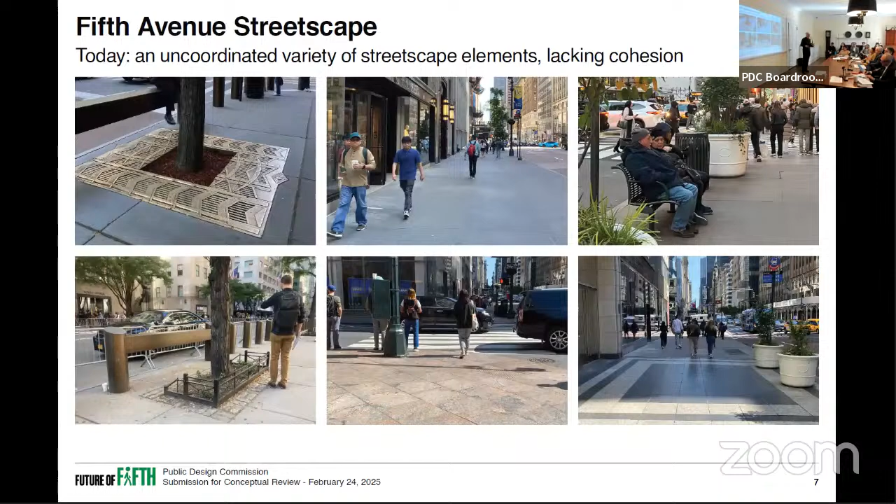In terms of clutter accumulated on the street over time, there's a lot of different components. This is just a handful of them, but from tree grates to planters to benches to lighting to paving, every portion of every block has a different ad hoc chunk of something. When you look at the different blocks from 42nd Street, you've got a beautiful bluestone paving on one side, and on the other side, it's cast in place concrete.

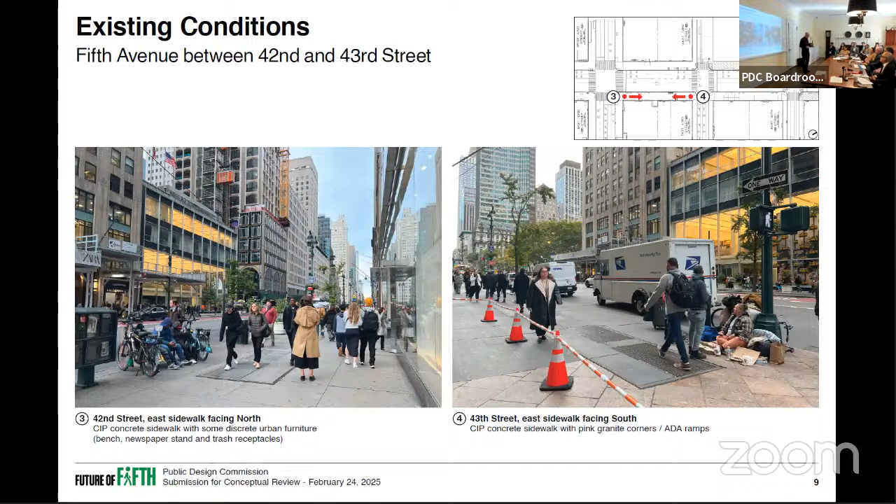What we've learned from 18 months of meetings with many different stakeholders - as I say, they're not shy with sharing their opinions in terms of what they don't want and what they do want, and often these are contradictory.

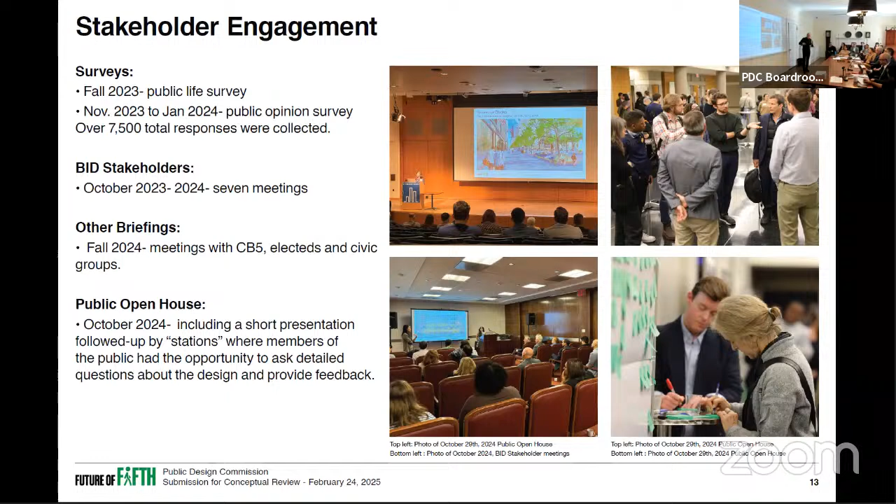We've had meetings with CB5 and other neighborhood groups, a public open house in October 2024, which was quite well attended, and again quite a lot of support came from that.

The key priorities: people overwhelmingly want wider sidewalks that are comfortable to walk on, inviting. They want more trees, a sense of nature, a sense of greenery. They see the beauty of Bryant Park and Central Park and wonder why we can't have a green corridor connecting those two. And generally a more comfortable environment with a strong sense of place or a distinctive identity.

A couple of things inform the design approach. The first is the character of the street itself, primarily the architectural character. There's a lot of classical architectural buildings, a lot of limestone. There's a lot of Art Deco buildings that are quite decorative in terms of arched doorways and windows. There's a lot of bronze and that kind of gold feel.

There's a few glass and steel contemporary buildings mixed in too. So it's an eclectic mix, but overall it feels like quite a classical street, almost London or Parisian in terms of its character. And the materiality - we like to say it's got a kind of blue gold thing going on. A lot of the paving has a blue tonality, and a lot of the building facades have a bronze or gold quality in terms of the limestone, sometimes sandstone, and a use of bronze and brass and other metals that have this kind of quality to them.

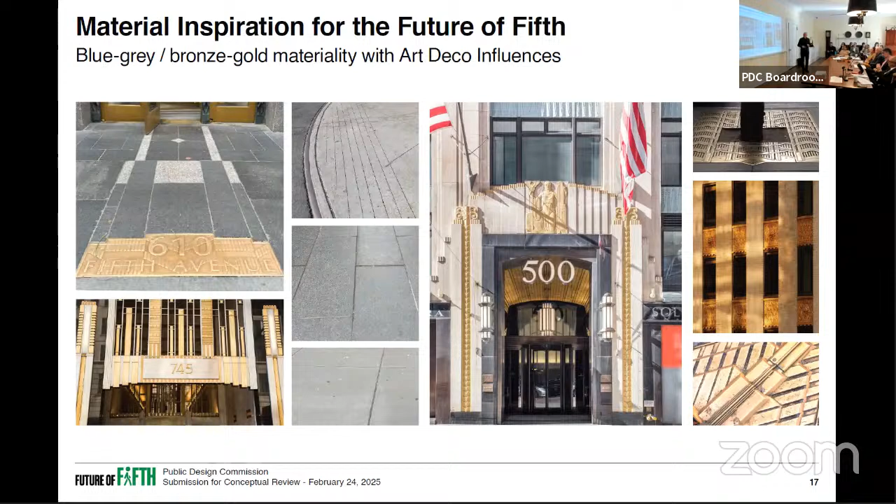The roadway today has two 23-foot sidewalks and a 54-foot traffic lane with 5 lanes of traffic. We're trying to add 10.5 feet to those sidewalks to make them now 33.5 feet, and reduce the traffic lane to 2 vehicular lanes and 1 bus lane.

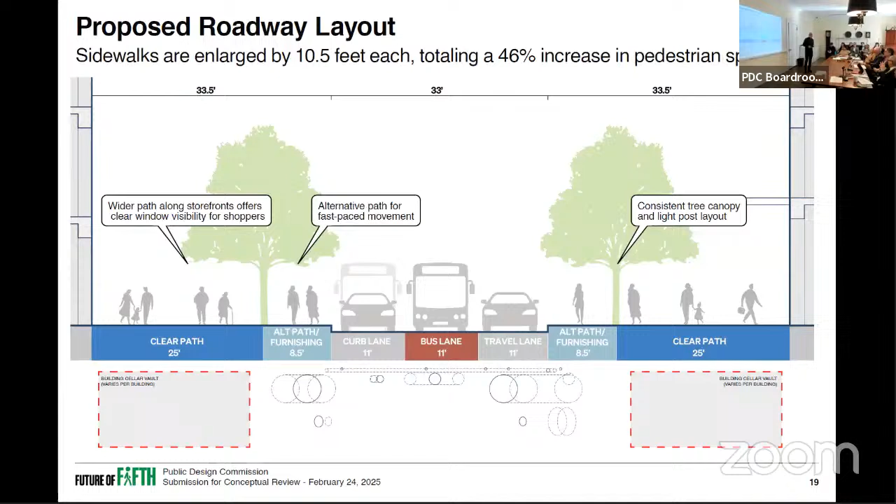And you can see this is really indicative of a lot of the challenges we have with regards to being able to have well-paved sidewalks that don't buckle and damage over time, as well as a really nice line of trees that are planted in a beautiful way and maintain that line.

When you look at the elevation, the sort of elements we're talking about are tree grates, semi-mature trees that are lofted quite high at the time of planting for visibility and also to maintain a line. Low planters, only 12 inches high, will have a variety of perennial flowers and shrubs, as well as annuals planted by the BIDs.

A decorative light pole has dual pendants, which is very useful because it's not in this profile, it's in that profile. One pendant shines light onto the sidewalk, the other into the street.

Two planters can be moved and located in strategic locations. They're both relatively low, 2 feet and 3 feet, because the shop owners want to maintain visibility to their shop fronts. These will be planted by the BIDs in a seasonal way, could be as much as monthly, with new plantings to ensure lots of flowers and color and festivity along the street.

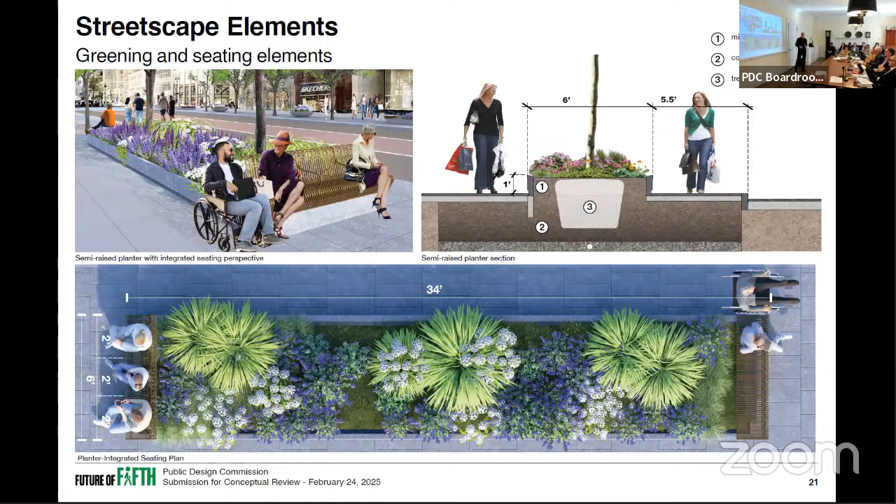Then there are the other elements, the seating element, which is always on a north-south end of a planter in order to keep sight lines up and down the avenue and also keep the walkway clear for pedestrians. The planters have just a 12-inch lift to protect the planting beds. They're low enough to discourage seating and to allow instead for lots of lush plantings.

The street as a whole could be said to have really three components. One in blue is just the long street itself, the streetway. In orange you have what we call the gateways, the primary east-west roads that cross Fifth. And we have what we call three piazzas, to recognize the importance of the public library, Rockefeller Center and St. Patrick's, and Grand Army Plaza and the Apple Plaza — locations that have something that calls them out, makes them a little different from the actual street.

So when you look at the street, what we call the connector blocks, you're looking at the new sidewalks, which are 33.5 feet across. There's a 25-foot clear path. This is a recommendation by DOT for what they call global corridors — a corridor that expects thousands of people every day, so the 25 feet is for a clear path.

That's about the dimension of the sidewalk today, but that sidewalk today carries with it planters and lighting and benches and all sorts of other things. So now we have a clear path and an 8 to 8.5-foot social zone, which would have the planters, the seating, the trees, and the light posts.

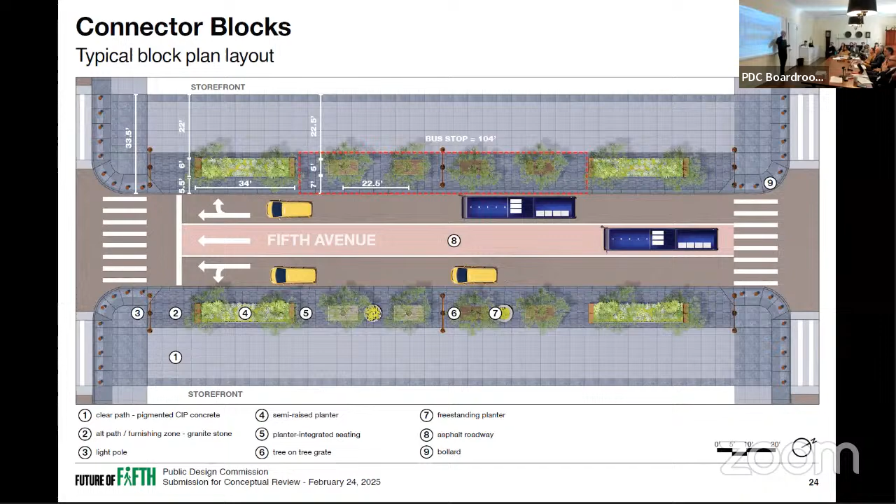When you look at that same plan but in a view, we have open, clear corners. We have bulb-outs on the east-west streets that reduce the length of the crosswalk. These crosswalks are now significantly wider than they are today, so they're both shorter in terms of duration of crossing, but more generous in terms of their width. You can see the trees and the planters and so on.

This is a view of a typical block, around 43rd Street today. You see the width of the sidewalk and the width of the 5 lanes of traffic. And this is it in its new state — going from a street that's pretty much all stone, concrete and asphalt to something that is now tree-lined, with a much more generous sidewalk and more pedestrian-oriented, more people-oriented design.

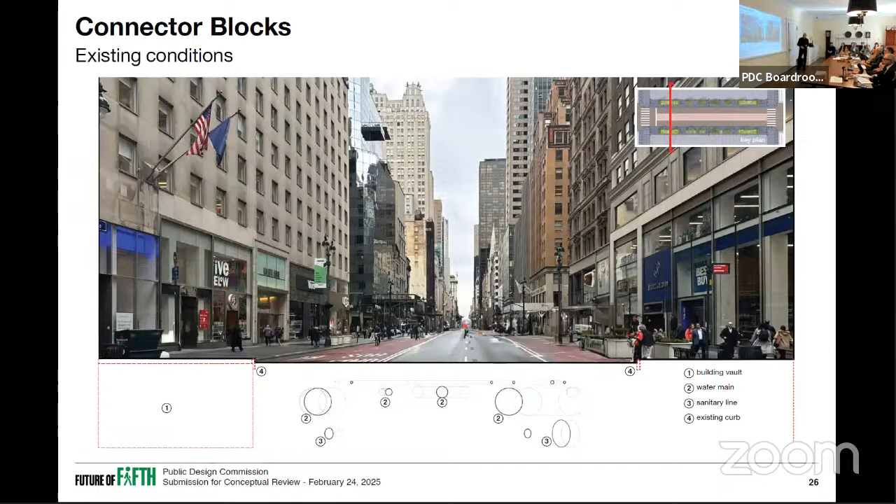You can see something we're trying to do here, which is to have increased area for soil, to actually try to create as continuous a soil trench as we can, so trees are not simply in little buckets but have room for the roots to spread horizontally. But we recognize we're going to have some challenges in certain locations with utilities.

This is another view of 42nd Street facing north today. You can see the congestion on the sidewalk, and this is it tomorrow.

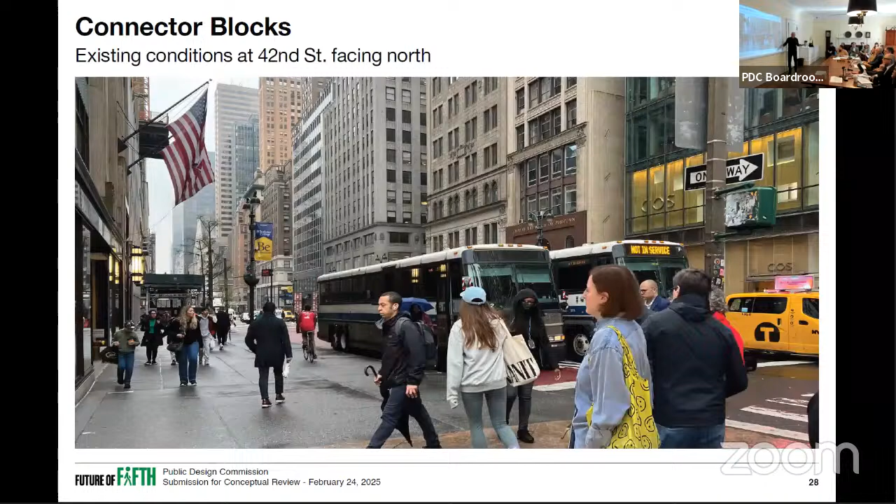You see the width increases from the sidewalk being there to going all the way out to there. And it's in that additional space now that we can have plantings with flowers and color and display. We can have trees that are lofted high, so you get clear sight lines along the avenue. The trees go all the way for 20 blocks, and you can see the light poles lend a sense of classical quality to the street. Another photograph at 43rd Street, and there you have the new Fifth Avenue.

The second component are the gateways, and you see here in yellow that we're proposing raised crosswalks. These are bump ups that are flush with the sidewalks. They're really good for calming traffic and for keeping traffic behind there when there's a traffic light, but they're also keep it safe for pedestrians to move.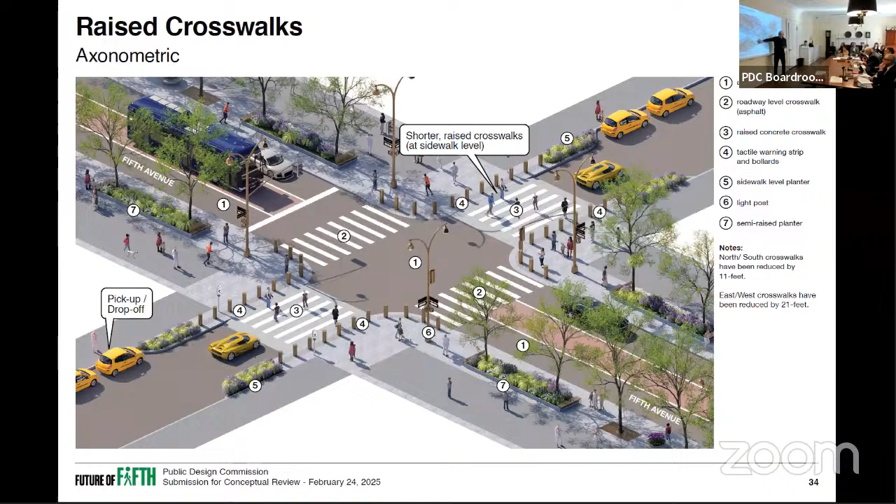So the raised crosswalk here on cross street, you see the bulb out here, which reduces the width of that and allows us to increase this dimension so that those sidewalks are clear. And the larger tabled intersection that comes all the way up on all four sides. These are intended to be concrete. The road will be asphalt.

And finally, the piazza blocks: the Bryant Park Public Library, Rockefeller Center, and Grand Army. These are raised piazzas too, except for Bryant Park. That is not raised, that's held at its current level. But you recognize that these are landmark destinations along Fifth Avenue. They're highly populated, especially Rockefeller and St. Patrick's, especially during holidays, just tens of thousands of people.

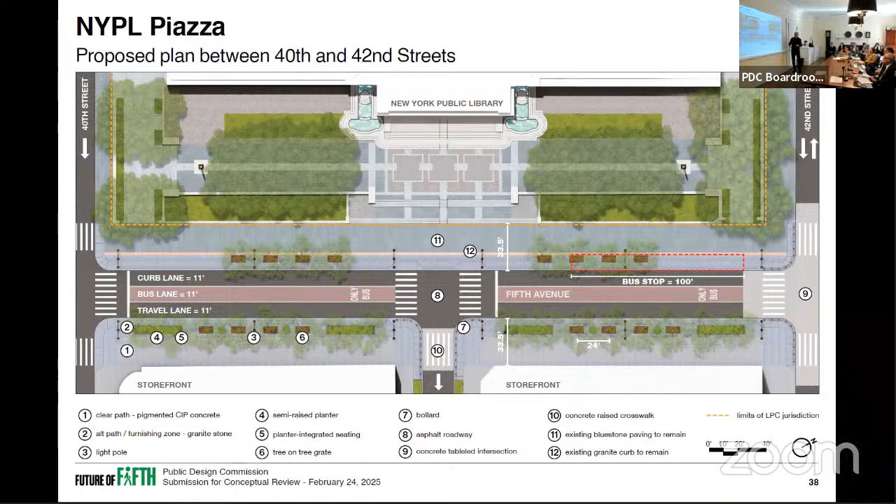So the idea here at Bryant Park, we have the existing bluestone paving and curb, which is beautiful. That will remain. We're going to add 8.5 feet of new granite in the manner of the whole avenue. It reduces the laneways. We have these 4 trees here that are in relationship to the trees that are here. We have the 4 lampposts that form a sort of gateway and respect the symmetry of the facade of the building. And on the other side, we have a long line of trees.

The central piazza, this is at Rockefeller Center. You see Channel Gardens, there's a planter here. This is the one place where we put seating looking into Channel Gardens. That's simply because this is one place where a lot of people gather, and seating would be appropriate there.

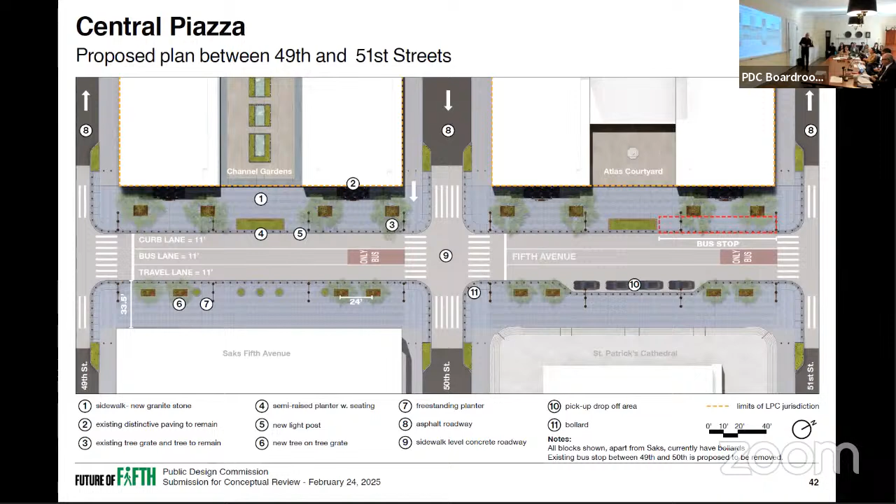We do the same at Atlas Courtyard, keeping this side relatively open because Saks Fifth Avenue, the frontage of Saks, and St. Patrick's Cathedral are again very pedestrian heavy. So trying to keep that open, keep the bits and pieces away. And you can see a view there looking into the Channel Gardens and the widened sidewalks.

And then finally towards the northern piazza, the Apple Store, Pulitzer Plaza, Grand Army Plaza. Treating this, we added planters here in order to direct pedestrians to the crossings. Right now, there's a lot of pedestrians crisscrossing in this particular block.

And you can see again the widened sidewalks. We chose not to put trees here in front of Apple because of the Apple Cube, the kind of iconicity of Apple. But the Apple Plaza itself is very well planted, and there's also lots of seating there. Same here, we didn't add trees on Grand Army Plaza because it has its own kind of tree-like identity.

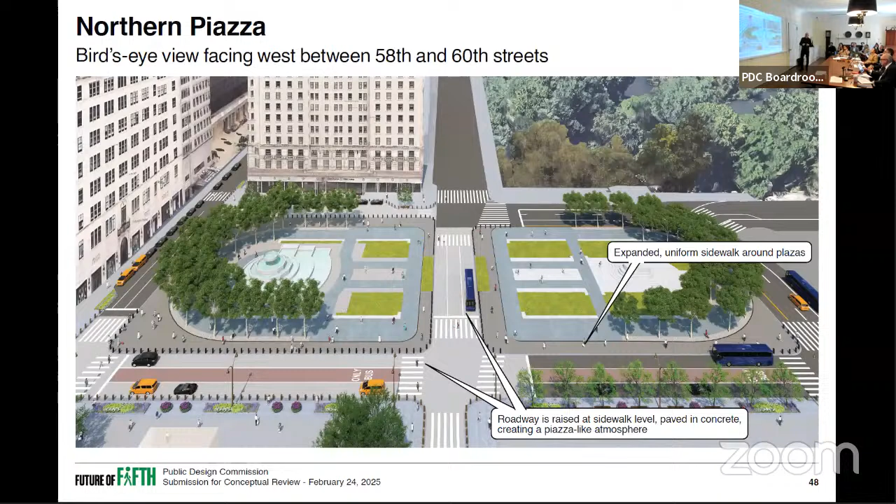And when you go to the after view, you can see this majestic line of trees for 20 blocks. The lights are simply in those canopies, projecting light safely down onto surfaces below. Widened sidewalks, emphasizing and prioritizing pedestrians, and still a fairly efficient circulation system for cars dropping off, picking up, and for buses.

We've been at it for 18 months, a lot of studies, a lot of outreach. We're here, and we're about to start schematic design. It doesn't go for that long. Hopefully in the summer we'll have a schematic design set, and then the city will decide how to take it further and proceed. So thank you.

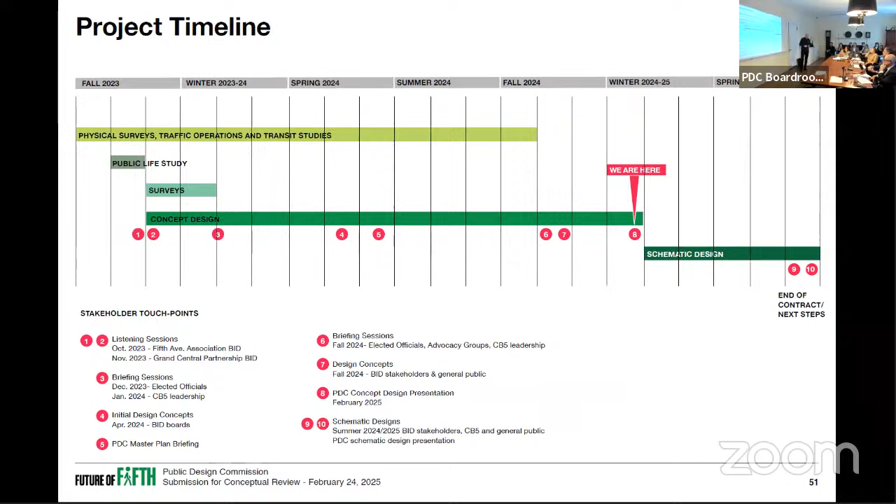Thank you, Jim, and thank you everyone for coming today. I want to start by saying we all understand how important this project is for the city, not just for Manhattan, but for the whole city. We also understand the complexities of it, both underground and above ground, and in terms of the stakeholders.

I know my fellow commissioners will have comments and questions, and I do too, but I want to say that the sensitivity you just described, block by block, and the reference to a quietness in the design that references other grand boulevards around the world, as opposed to specifically New York idiosyncratic — if that's your intent, it's well achieved.

I think there's a long road ahead of you, but you're off to a very strong start in bringing this critically important boulevard to what it could be. I really appreciate that, and I can see the whole team has been part of that. So before I have specific questions and comments, I want to open it up for Carrie, Manuel, and Bill.

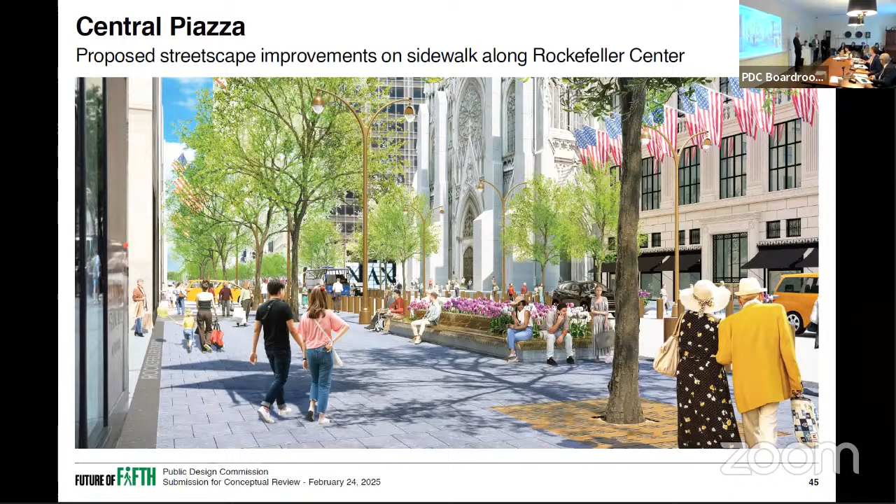Okay, so my question was going to be, is there a net loss in seating? But what you're telling me is there's a massive net gain in seating - a 20-fold increase over the 6 benches that are there now.

But with regards to seating too, a lot of the stakeholders are not keen on more seating. It has to do with how retailers perceive their frontages, and also it's a piece of furniture that can begin to add to the clutter when you're trying to keep a freeway for pedestrians, lots and lots of them.

So I think we have the right balance of seating because essentially there are 8 6-foot benches per block. They're oriented north-south in order to keep the clearway clear and to allow anyone sitting to have a long view up or down the avenue, or an oblique view, as opposed to just a short frontal view to a shop window. As I say, the shop owners are not at all keen about people sitting outside their storefront.

I think, believe me, this is probably iteration number 20 of options in terms of seating. We had versions with more seating, less seating, configurations this way or that way, and this is where we've ended up. I think everybody's very satisfied with this.

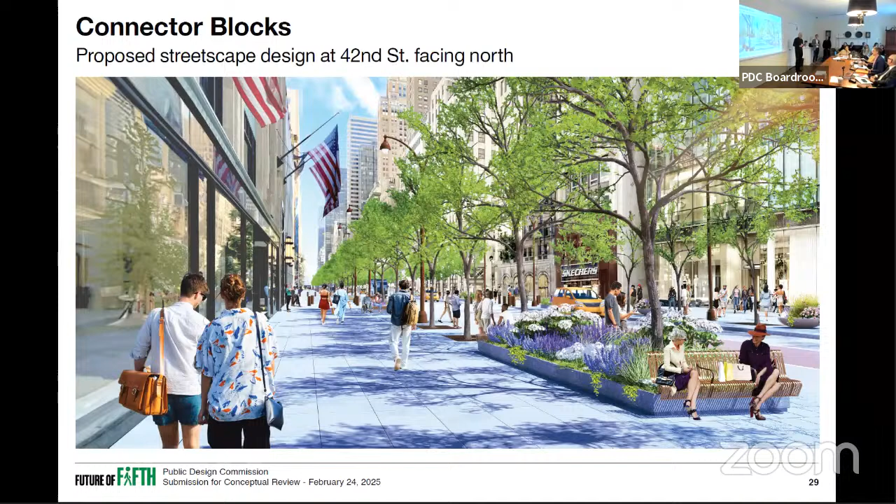Okay, thank you. We had last time asked a question about companion seating. I think right now you have it at the end of the bench. Can you speak to that, Jim? Well, this is the configuration at the moment.

There's a new set of guidelines out for ADA called PROWAG, Public Right-of-Way Accessibility Guidelines. They're supposed to be, and they are in fact, more attuned to life on sidewalks than ADA guidelines - more specific to pedestrian traffic on sidewalks and in public spaces. One of the things PROWAG promotes is, on the one hand, this kind of seating where you're at the end of a bench, so if you're with a companion they can sit on the bench and you can pull your wheelchair next to them.

But PROWAG also advocates for a situation - where's that next slide, Cricket? - where the wheelchair can actually be pulled in front. This sort of situation is more social. Instead of somebody just formally sitting next to you, you can pull your wheelchair around and either be parallel to the bench or slightly on an oblique angle to it. This is the kind of configuration that PROWAG is really promoting.

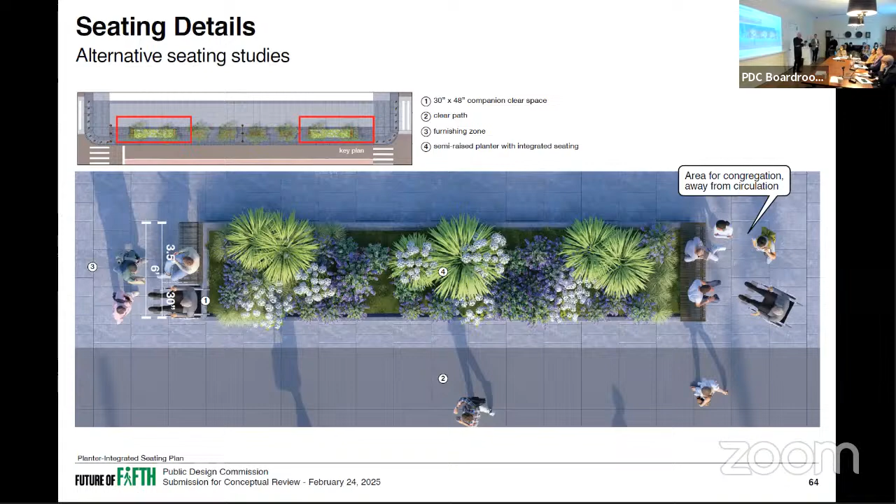And we have all of this space here that's out of the primary path of circulation. If you were to try to pull the wheelchair in so that it's out of the way of the primary path, then you end up with a very diminished bench - you've lost 33% of the bench. It would also require the bench to be pulled forward, whereas right now it's actually in the planter.

So we still have a few more studies to do on this. We're aware of the sensitivities about accessibility and people feeling comfortable, and making sure it's 100% accessible for everybody. We're going to meet with the MOPD, the mayor's office, for that. We'll run this by them, but we're quite compelled by the PROWAG guidelines - yes, a wheelchair next to the bench is one option, but being able to be parallel or more convivial with your companion on the bench is an even better option.

So understood, and no one wants to see the bench get 33% smaller. I guess our request would be to study whether there's a way to make it feel intentional, so that if I'm in a wheelchair, I don't feel like I haven't been considered. That's the thought. I think that's a good point. I think in the next step we'll look at it again, do our best, and again we'll meet with MOPD and go from there.

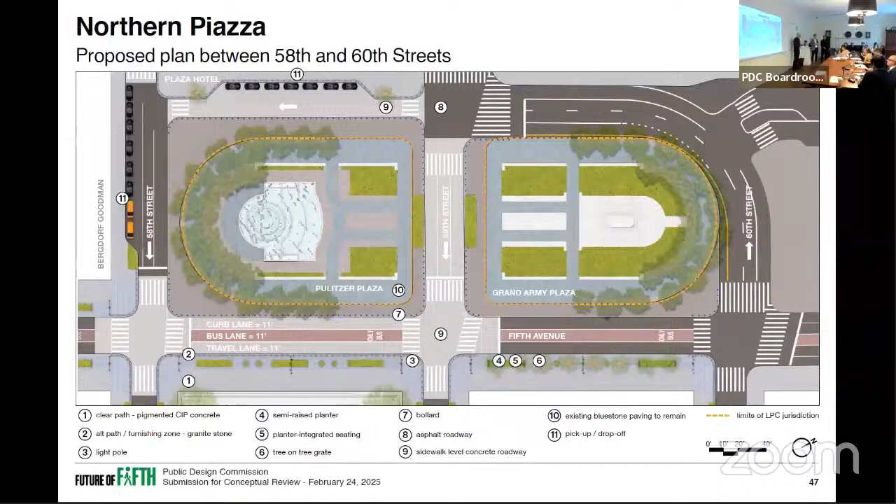Okay, I had a question about the piazzas. This question of putting in the curves - I'm wondering, and this might be a DOT question, what evidence or experience there is from other cities. I get it for when it's a holiday and we're just shutting it down, and everyone has to go somewhere else because there's an ice skating rink or whatever in the middle. But how does that function if the whole piazza is marked in the same way for traffic calming and everyday traffic? What's the experience in other places?

So the experience in other places and in the city as well - just as some context, along the Broadway corridor, for example, we've been rolling out shared streets through our in-house program for the past 5+ years. We've been able to learn a lot about how people interact with these spaces, which is really informing capital efforts like this one and elsewhere. What you see is a very positive traffic calming effect, whereby vehicles are naturally slowed down through visual cues in the street, creating an unfamiliar type of environment.

It creates a kind of natural hesitation, which causes traffic to slow and become more aware of their surroundings and the presence of people. As James said, the intent is to create these more flexible spaces allowing for more temporal activations. But the orientation of the street will still remain very much consistent with the remainder of the corridor. The plantings, lighting, and other street furniture will still remain on the strong north-south axis, so you still have this clear sense of this is pedestrian space and this is vehicular space. As the project advances and we get into further levels of design, we'll think more closely about how the interaction between the sidewalk and the roadway works, and what kind of tactile information we need to provide for pedestrians with low vision, to ensure they're aware they're transitioning from one type of space to another.